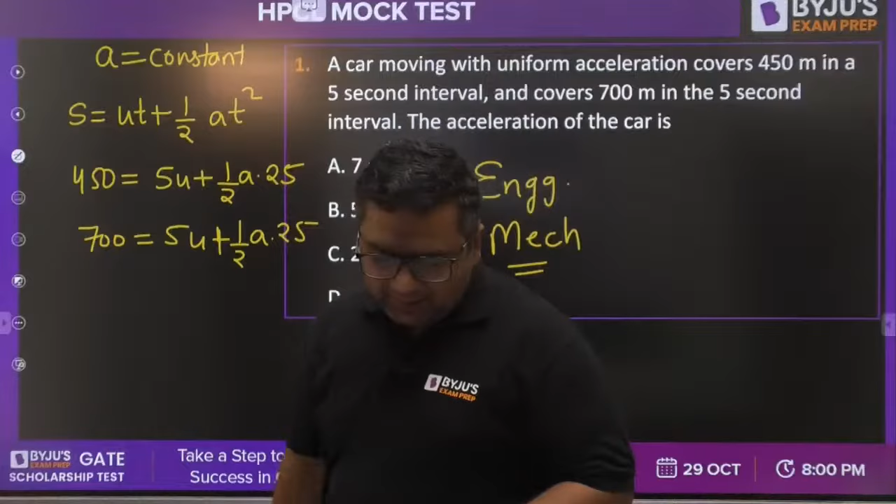Utkarsh is also saying D. Kiran Kumar is also saying D. And guys, the answer will be coming out to be A equals 10 meters per second square. So yes, D is the right answer. D is the correct answer. So this type of question will be there in HPCL for sure. Anurag, very good dear. Answer will be D for this.

Moving to question number 2 guys. Here option B is this. So he is saying a particle is projected at an angle. This is from projectile, once again engineering mechanics. You can see in the previous year's question also, there were some questions from projectile. So a particle is projected at an angle of theta.

So you can assume that there is a particle which is projected at an angle of theta. Obviously it will be a projectile motion. He is saying that at an angle theta to the horizontal it attains a maximum height of h, and he's asking the time taken by the projectile to reach the highest point of its path.

Sanket is saying the answer to be B. What about others? This time also you will be applying the equation V square minus U square equals 2AS, the equation of motion, because at this instant the velocity in the Y direction is 0, and you are applying this equation in the Y direction. Utkarsh is also saying B.

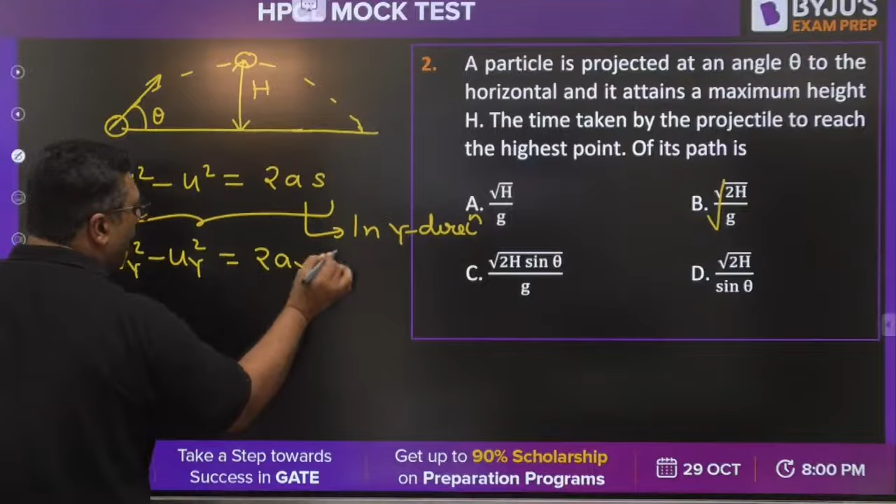What about others? So you need to apply this equation in the Y direction. You will write Vy square minus Uy square equals 2Ay Sy. Vy is 0, Uy is U sine theta, Sy is H as given, and Ay is minus G. These are the things given when you put in the values.

Tomato Singh, Anurag, Mechanical Warrior, Kiran, Vineet, all of you are correct. The answer will be coming out to be B. So B is the right answer. Very good guys, bahut hi badhiya.

So guys, moving to question number 3, I am going to consider around 35 questions out of 85 because I have made more subjects, design plus material science.

Anu Ajay, good morning. Thanks dear. So solve this question now.

The tension in the cable supporting a lift moving upward. So you can see there is a case where there is a lift and mass, and there are two cases. This is also from engineering mechanics. In one case, the lift is moving upward with acceleration A; in the second case, it is moving downward with acceleration A. So you need to use these two cases to tell what is the acceleration of the lift.

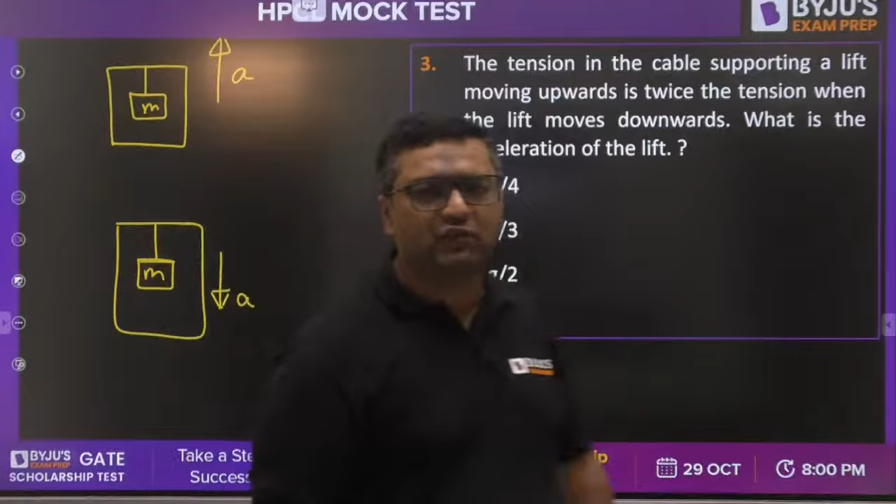Okay, Warrior has given the answer for question 3 as B. What about others? Vineet is also saying B. Very good. Tomato, Anurag, Kiran, Utkarsh - what would be the answer, guys?

Okay, Kiran is saying the answer to be B again. You know that when you apply the free body diagram, this is M, Mg will be acting downward, tension will be acting upward. So here you will write: T minus Mg equals Ma, so T equals Mg plus Ma. Or here you will write Mg minus T equals Ma.

So he is saying that tension is twice for one case, so tension here is Mg minus Ma. Just put this tension as T1 and this as T2. He is saying that the tension in the cable supporting a lift moving upward is twice, so T1 is 2 times T2. When you put this, Mg plus Ma equals 2 times Mg minus Ma, so you get acceleration to be G by 3. B is the correct answer, very good.

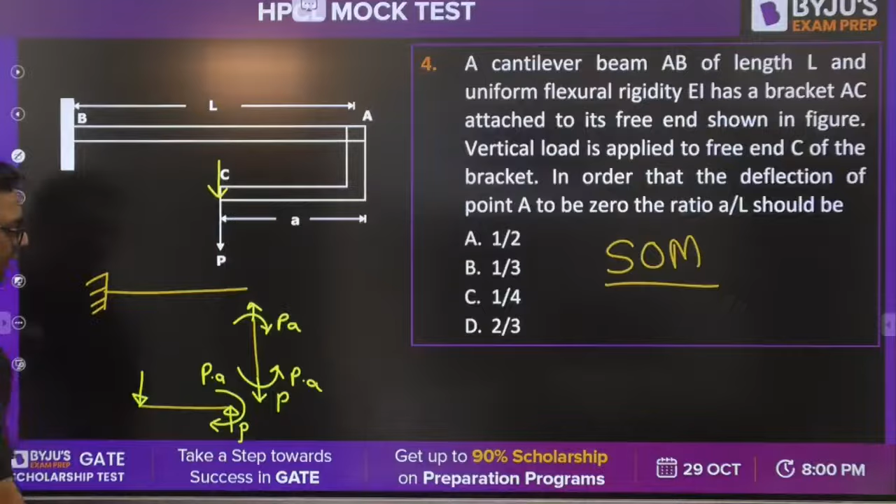As you know, this is A, so this will be creating P force and P into A here. To balance this, this is the force P, and this is P into A couple. Who will be giving this? This member. So when this member applies some force as a reaction, it will give the same here. If P is acting here coming downward and here it is clockwise, it will come anti-clockwise with P into A. Now for balancing this member, there will be a P upward and P into A clockwise. As this is coming because of this member, reaction will come P downward and P into A anti-clockwise.

So you need to see the deflection at point A. Deflection at A will come because of a force and a couple. Deflection at A because of force will be PL cube upon 3EI. Why PL cube? Because length is L for this AB member. Then you write ML square upon 2EI. Bending moment is P into A. Now you put this to be zero. This is downward, this is upward, so minus and plus will come. When you equate, you will get A by L to be 2 by 3.

So I feel D is going to be the right answer, no doubt about that. Very good, guys. Very good, Utkarsh, smarter. D will be the answer.

Moving to the fifth question, once again from strength of material. This is column topic and Rankine theory. As I said, every time I am coming with new questions so that you get something new in every class. That is the benefit of coming live in the classes. What would be the answer for this one? Question number 5th it is. I am still left with 30 more questions and total 85 questions will be solved by the entire team today.

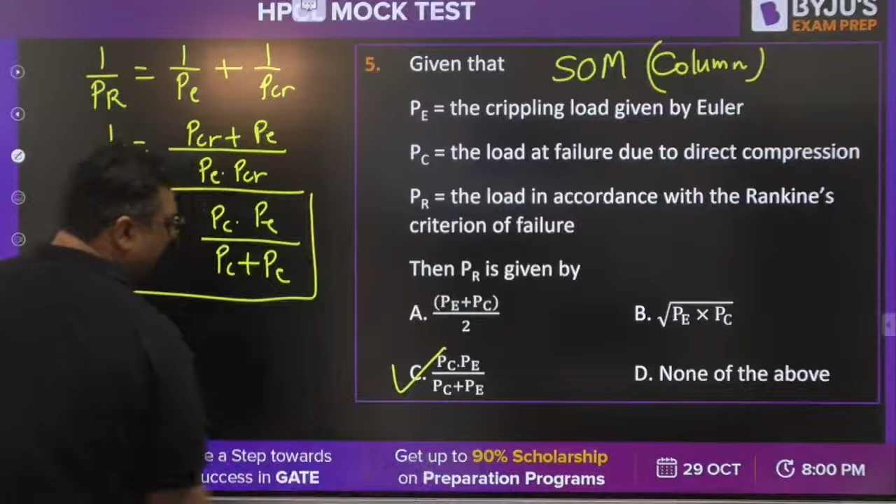Very good. Every one of you have given the right answer. Utkarsh, Vineet, bahut badhiya. Moving to question number 6, guys.

Moving to question number 6. This is from machine design now, design of shaft. Machine design, design of shaft. I am covering all the subjects related to design and plus material science.

Solve this question, guys. Okay, Warrior is saying A for this. Very good. What about others? Vineet, Utkarsh, Sanket, Kiran is also saying A would be the answer. Anurag is also saying A would be the answer. Vineet is also saying A will be the answer. Bahut badhiya. Mani is also saying A will be the answer. Very good, Mani.

So guys, the answer is A for this only. So you know that when we are having a shaft and it is subjected to a bending moment of M, then bending stress induced will be 32M by pi d cube. Similarly, when we will be having a shaft subjected to a twisting moment of T, then shear stress will be coming out to be 16T by pi d cube. They are saying both are equal, then you will be equating sigma B equals to tau S. This is 32M by pi d cube and this equals 16T by pi d cube. So they are asking M equals, M will be coming out to be T by 2, then only it is possible. Okay, so answer 6 is going to be A.

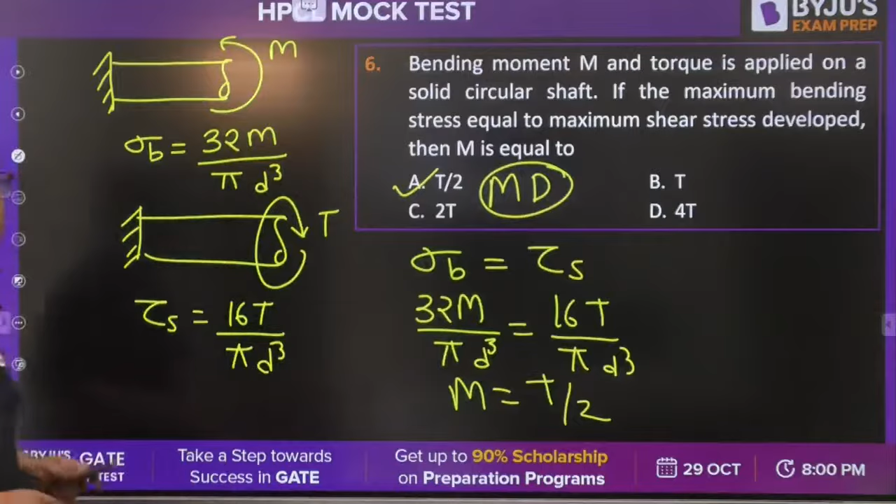Very good, Vineet, Utkarsh, Mani, everyone. Moving to question number 7. This is from strength of material, or you can consider it from machine design also, because here torsion equation will be used and you are going to use the design of shaft again. So from both you can consider, but it is originally from machine design because you are putting strength equals to stress, you are finding the dimension here. So solid shaft subjected to a torque is given to you, permissible stress is given to you, diameter you need to find out.

Yes, Kiran is saying A will be the answer. This is going to be the level of HPCL, guys, not more than that. Vineet is also saying A.

Yes, Mani, Anurag, Utkarsh, Kiran, Warrior, God of Thermodynamics, Tamatar Singh.

What would be the answer? Very good, Anurag, A. What about others? Mechanical Warrior is also saying A. Very good, guys. So the answer for this question is A.

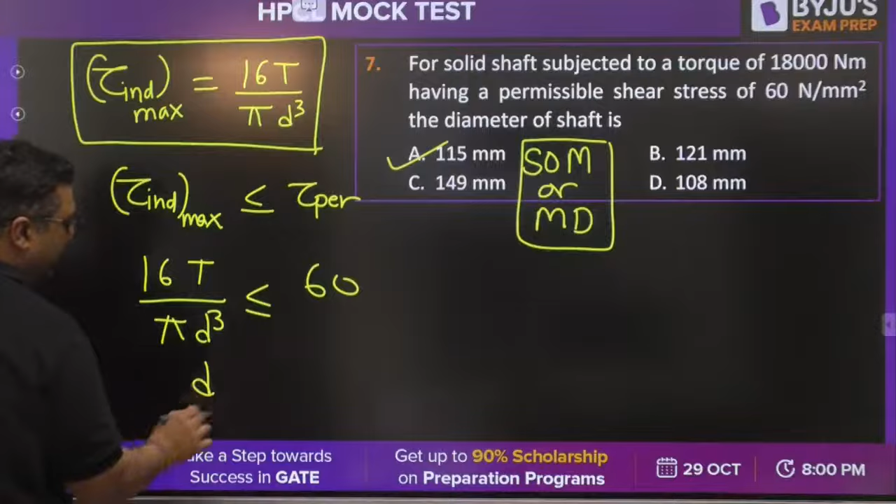You know that tau induced maximum is given as 16T by pi d cube. If you use this much, this is SOM, but when you write tau induced maximum should be less than equals to tau permissible, this becomes machine design. So 16T by pi d cube less than equals to tau permissible is 60. You will get dia to be more than equals to 115 mm. A would be the right answer.

Question number 8, it is very easy, but this type of question is there in HPCL. That's why I am keeping the similar question, because exam pattern is going to remain same. No Utkarsh, but 3-4 questions they have given last year also, which you would have difficulty solving without calculator, so I have maintained that as well. Because 3-4 questions will be coming like that, so for that you must be prepared. Solve them in the last, where you find a lot of calculation.

Achint is saying C, Anurag is saying C, Sanket is saying C. Anurag, Vineet, Achint, Sanket, Warrior, Kiran. Very good. So the answer for this is C, because we know that dm by dx is equals to shear force and dv by dx is equals to load intensity. So C is the right answer.

Moving to 9th question, this is once again from the 7 to 8 cases of deflection which you need to remember. Let us see how many of you give the right answer for this.

Very good, Mani. Question number 9, what would the answer be? Warrior is saying A, Kiran is saying A. Very good. If you remember that table of 7 to 8 cases, you can answer it very easily. Anurag is also saying A. Very good. Yes, Sanket, Achint. Sanket is saying A. Very good. Achint, Vineet. Very good, Mani. Answer is A. Shubham Shekhar. Very good. Answer is A.

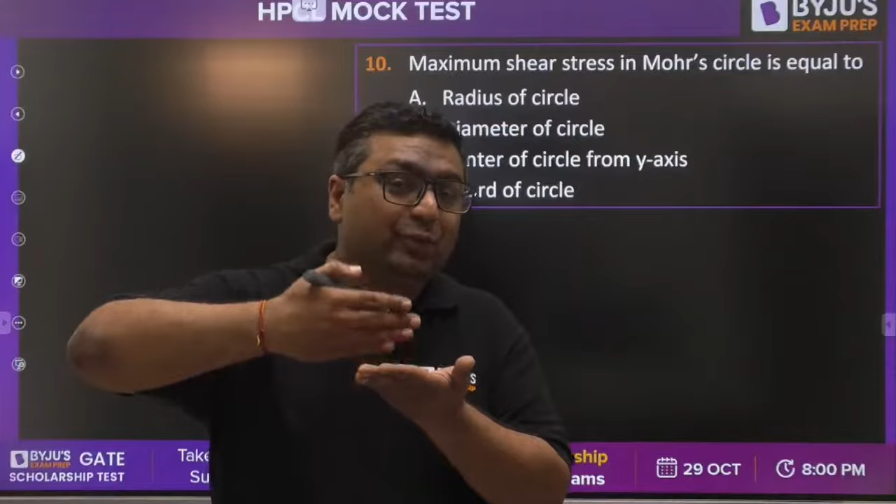Sanket, very good. Dear, actually, this is the philosophy. Like if we are studying, when we are away from the exam, we try to keep the level of questions a little bit harder so that you prepare for something better. But when the exam is near, your motivation is also required. So when exam is near, at that time you need to solve questions just like the exam is asking, because if I keep very hard questions, you will be unable to solve them and get demotivated, and the level of exam is not going to be that much. So that is the philosophy. Whenever you prepare, even for test series, even for GATE, this will be followed by all the test series. So tests which are near, like CBT near to GATE, they will be of GATE level only. Before that, whatever you give will be of harder level a little bit. So this is the philosophy, actually.

So guys, when we are talking about Mohr circle, whenever Mohr circle is plotted, one end gives you sigma 1, other end gives you sigma 2. And if that is the case, diameter of circle is given as sigma 1 minus sigma 2. So radius is given as sigma 1 minus sigma 2 by 2, which is nothing but tau maximum. So radius will be the right answer.

So next question is from spring, once again a machine design question, design of spring. Here they are asking about the series parallel connection. Let us see how many of you give the right answer.

Warrior is saying B for that. Very good. Kiran B, Vineet B, Sanket B, Achint B, Anurag B, Utkarsh B, बहुत बढ़िया. God of Thermodynamics B. And guys, yes, the answer is going to be B.

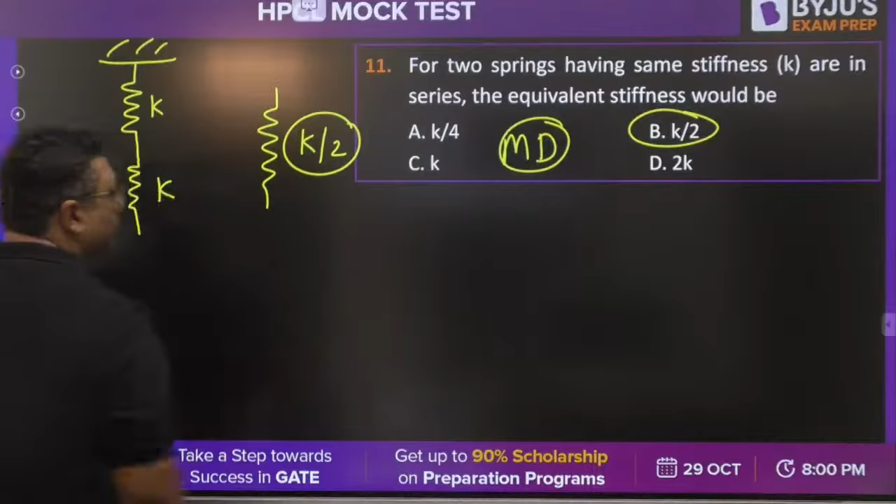They are saying two springs having same stiffness are in series. There is one spring stiffness K, there is another spring stiffness K. So my dear, if that is the case, the equivalent spring will be having a stiffness of K by 2. So B is going to be the right answer here.

हाँ, कटिंग में 2K आएगा when you are going to cut a spring into two parts, then stiffness becomes double. Why does it happen? Because stiffness is inversely proportional to length. So when length reduces, stiffness increases.

A material is classified as brittle - this is from testing of properties. If you go as per GATE syllabus, it is the part of SOM. In HPCL syllabus, this is the part of material science. So this is the definition of ductility.

Very good. हाँ, parallel में add होगा पीयूष, बिल्कुल सही. So guys, just like and share the session. Warrior is saying D, Kiran is saying D, Anurag is saying D, Vineet is saying D. Utkarsh is skipping this. सोम नहीं attend किया उत्कर्ष।

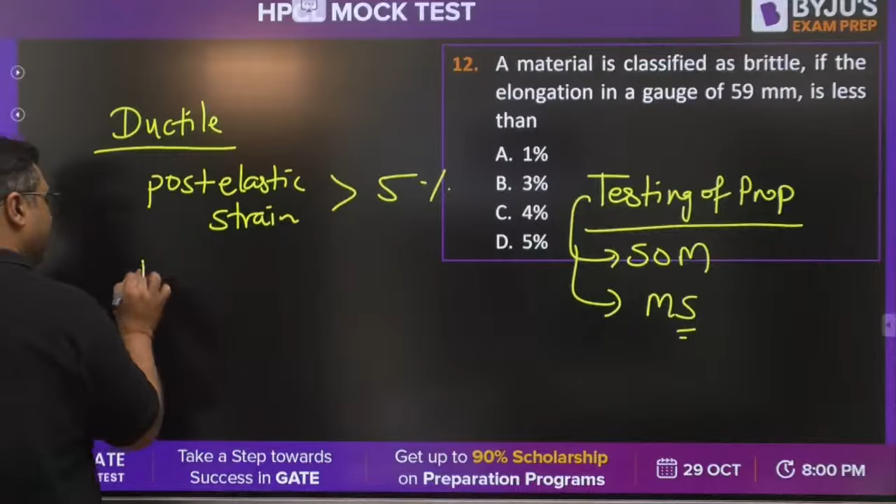If you remember, I told you a material is said to be ductile if post-elastic strain is more than 5%, then it is said to be ductile. And if post-elastic strain is less than 5%, the material is said to be brittle. So D is going to be the right answer here.

Question number 13 from machine design again, fillet weld. Very good, Parv. Very good, Kiran. Wonderful. Fine. So question number 13, in fillet weld, throat is defined as.

In fillet weld, throat is defined as. Fillet weld, if you want to see, my dear, I would like to show you. Like, let us say we have this kind of figure. So even we can show it with the normal case as well, like this. When you are going to join like this, if forces are acting like this, then this type of weld is fillet weld.

Yes, it is a kind of lap joint, you can say. This is parallel fillet. If forces are acting like this, it is transverse fillet. And if you want to see this, we can assume this fillet weld as a triangle like this. So this will be the perpendicular and this is nothing but the minimum thickness. This is going to be the minimum. So this minimum is said to be throat.

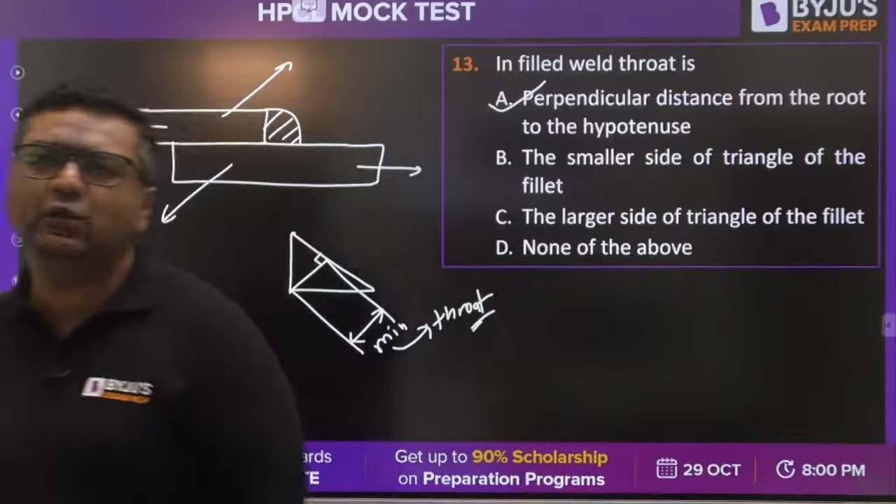Okay, so answer will be A for this. Very good, Utkarsh, Thermodynamics, Anurag, Vineet, Parv, Kiran, Warrior. Very good. Moving to question number 14.

Now the question is from Theory of Machines, Governor topic. So I have covered all the things, guys. This is from Governor - Sensitivity of Governor. The ratio of difference between maximum and minimum speed to the mean speed. The ratio of maximum to minimum speed. Range of variation in engine speed.

Very good. So guys, you know that sensitivity is defined as delta n upon n mean. This is the definition of sensitivity of governor. So for that, the answer is going to be A for sure. No doubt about that. Moving to question number 15.

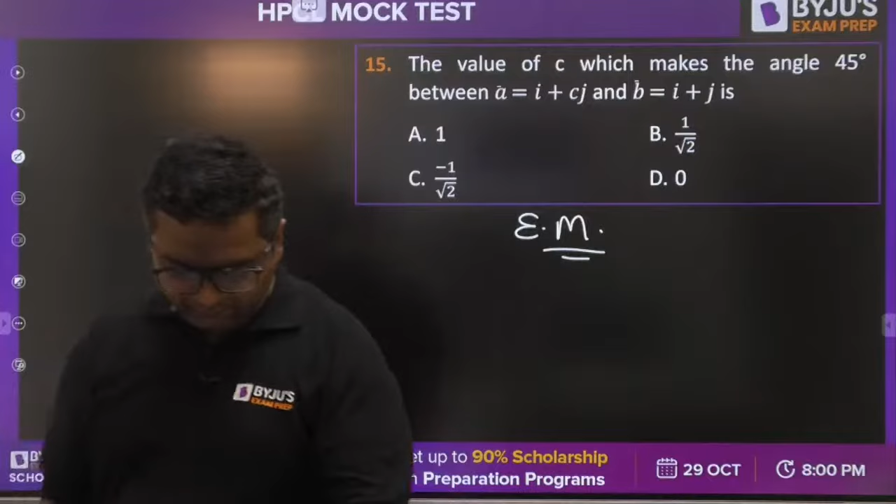Once again from engineering mechanics. This is from engineering mechanics. The value of C which makes the angle 45 degree between vector A and vector B. Yes. So you can see vector A is I plus Cj. Then vector B is I plus J. So you know it is mentioned that angle is 45.

Cos theta can be written as A vector. Okay, one second. Do you know the dot product? If I write dot product, it can be written as AB cos theta. So the same I will write here, A vector into B vector divided by A vector ka magnitude, B vector ka magnitude. This is what you need to do. Put theta as 45 degree, you will get your answer using the dot product. Wonderful, wonderful, wonderful.

Very good, Utkarsh. Vineet is saying B, Anurag is saying B, Kiran is saying B, Warrior is saying B. Yes, what about others? What about others?

You know that this is AB cos theta, using cos 45 which is 1 by root 2. Do you know how the dot products are calculated? 1 into 1 plus C into 1, it will be 1 plus C, divided by A ka magnitude, B ka magnitude. A ka magnitude is root of 1 plus C square, and B ka magnitude is root of 1 square plus 1 square. So solving this, you will get the value of C. So 1 by root 2 equals 1 plus C by root of 1 plus C square into root 2. Root 2 will be cancelled out, so 1 plus C equals root of 1 plus C square.

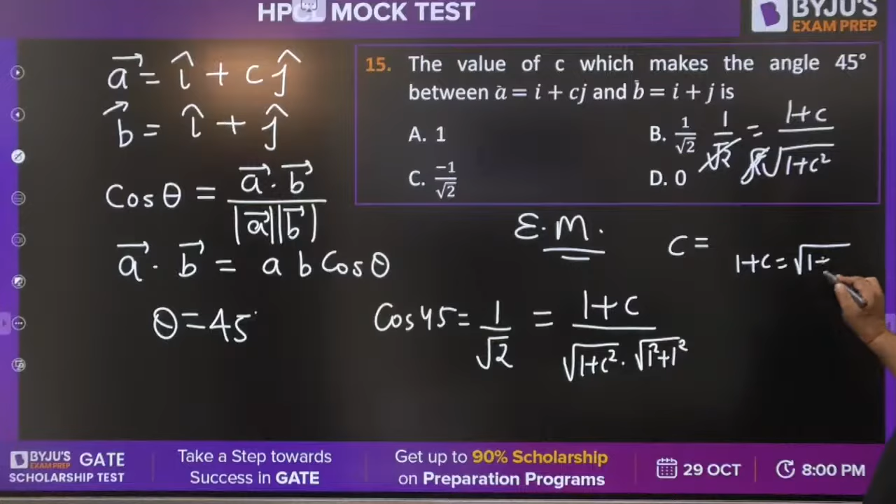Square both sides. 1 plus C whole square is 1 plus C square. 1 plus C square plus 2C equals 1 plus C square. C will be coming out to be 0.

The answer for this question is D. I feel none of you have given the right answer. Am I correct? Yes, D is the right answer. Scorpion, Utkarsh, Warrior, Kiran, Anurag, Vineet, this time all of you are wrong. Yes, you can use that geometry approach.

Very good, so moving to question number 16. This is from vibrations now, because we study SHM in vibrations only, so this is from vibrations.

Very easy question guys. Sir, when is the mock test for electrical? Sanjana, actually mock tests are planned for all the branches. Today we are having for mechanical. I feel tomorrow or day after tomorrow you will be having for electrical. So you will get an update for that, don't worry.

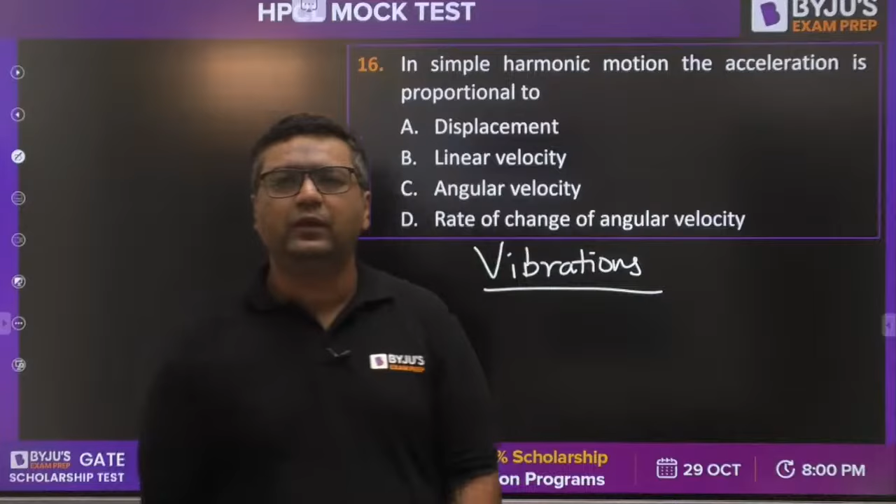Warrior is saying A, Kiran is saying A, Anurag is saying A, Vineet is saying A, Naveen is saying A. Very good guys. So you know that whenever we write the equation, it comes out to be mx double dot is minus sx. So you can say this is acceleration, this is displacement. So acceleration and displacement are directly proportional. A is the correct one.

Moving to question number 17, once again from vibrations. As I said, I have covered all the subjects, whatever related to design plus material science. Material science questions will be coming now.

Very good, Ramesh Mon. Kiran is saying answer to be D. Very nice. Sir, actually EM is remaining, so can't able to. No issue, no problem, we have time for that. Anurag is saying D, Warrior is saying A, Ramesh Mon is saying D. What about others?

Very good, Warrior is saying D. Very nice. So guys, the answer for this is D, because you know at node we have zero deflection, zero deformation, zero angle of twist. So that is why their vibration is also zero. Okay, so the answer is correct.

Once again we are moving now to strength of material, because there are properties: malleability, hardness, resilience, and isotropy. Let us see how many of you give the right answer for question number 18.

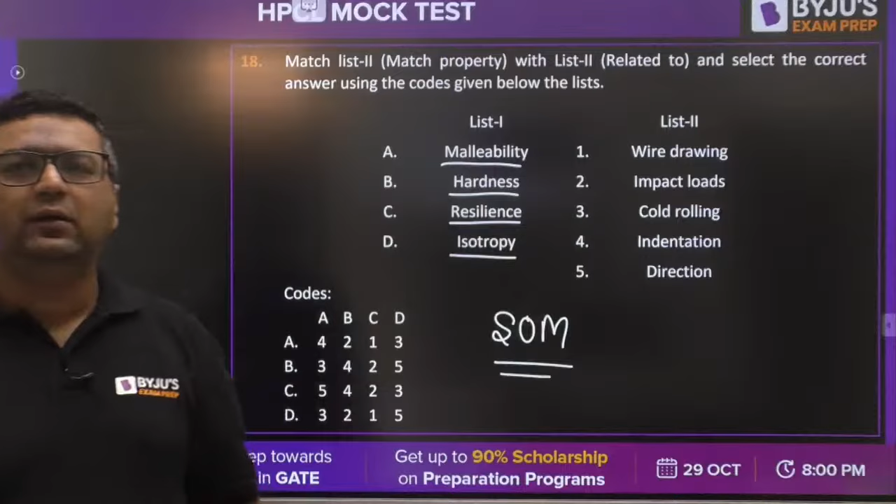Achint is saying B, Kiran B, Ranjit B, Mechanical Warrior B, Vineet is saying B, Anurag is saying B. Wonderful guys, the answer is yes, B.

Because you know that hardness is related to indentation; resilience, isotropy, malleability differ. Malleability is related to rolling, and resilience is related to impact load. Actually, toughness and resilience are related to that. And isotropy is related to direction, because when elastic properties are same in all directions, it is said to be isotropic. Moving to question number 19.

This is from Theory of Machines, gears topic.

Pitch diameter is equals to the product of circular pitch into number of teeth. Very good, so Kiran is saying the answer to question 19 is A, Anurag is saying A, Naveen is saying A. Very nice. You know that circular pitch is given as pi d by t. So if circular pitch equals pi d by t, where d by t is module, then it is pi into module. So in that way you can define the pitch circle diameter. Diameter is from the module, you can write it as module times t.

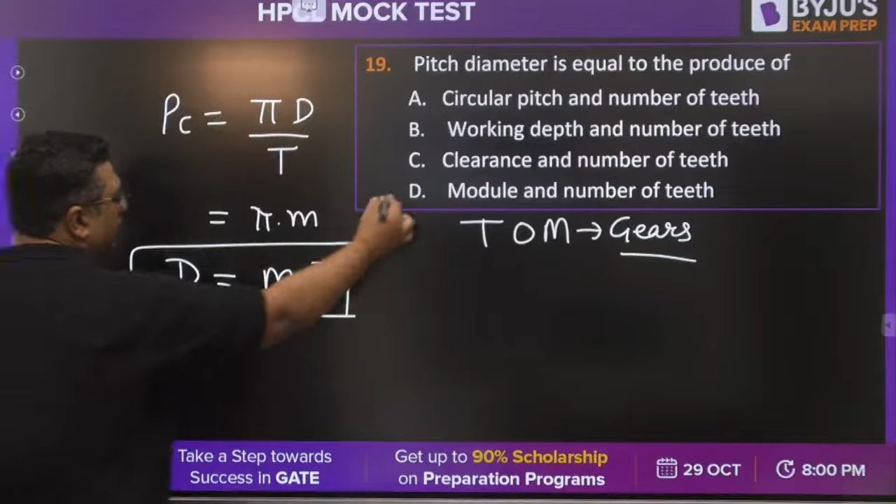Answer will be D. Moving to question number 20 guys, once again from vibrations: critical speed of shaft.

Critical speed of shaft. Very good.

Answer will be D for the 19th question. Warrior is saying A. If you remember whirling of shaft, critical speed of shaft, their vibrations are transverse, longitudinal, torsional. Anurag, Kiran, Vineet, Utkarsh are all saying A. The answer is A, because you were having a shaft on which we were having the rotor like this, so the rotor's weight was shifting the shaft like this. This will create vibration in this direction, which is perpendicular to the longitudinal. Perpendicular to the longitudinal is transverse. So answer is A. Moving to question number 21.

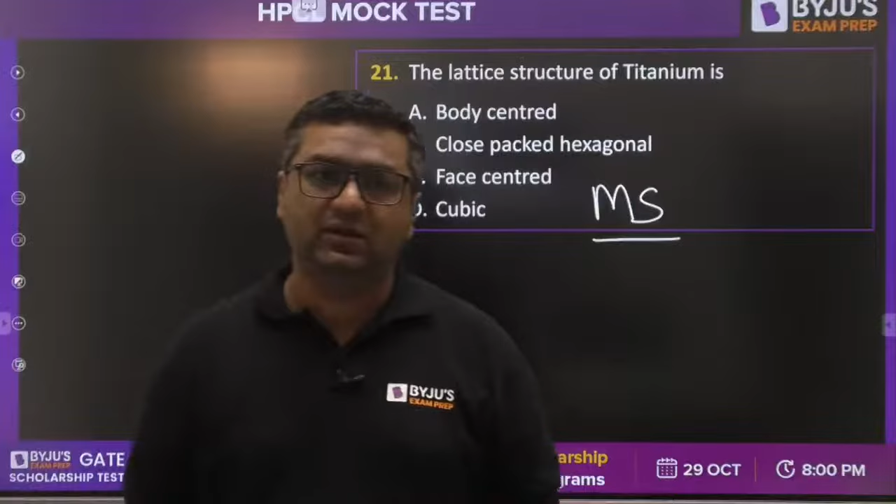This is from core material science. This type of question has been seen in HPCL examination. Even 3 questions were there on the crystal structures. Achint, Kiran, Warrior, Anurag, Vineet are all saying B. When we are talking about titanium, titanium is showing hexagonal close pack structure with C equals to 1.57 times of A. So the answer is B for that. Very good Utkarsh, Piyush, Ranjit. Answer is going to be B.

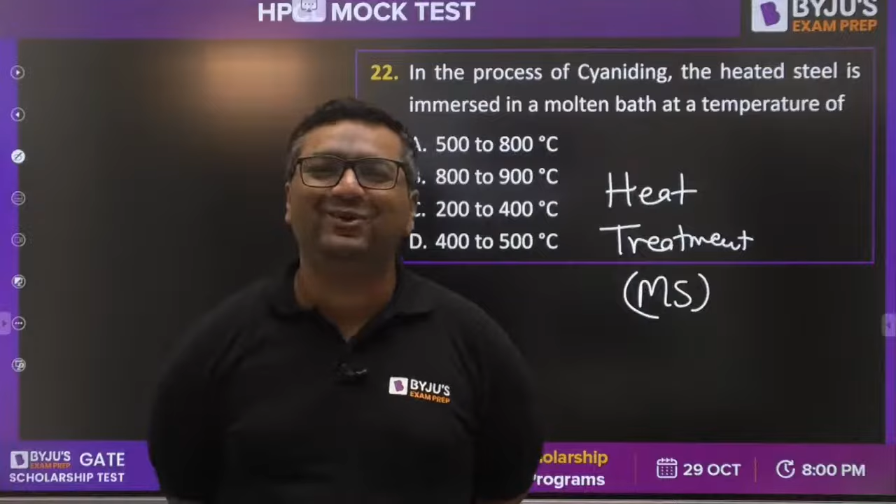Moving to the 22nd question, once again from heat treatment material science. They are asking about the temperature which we are using in cyaniding. Let us see how many of you give the right answer. Warrior is saying B, Achint is saying B. Utkarsh not sure, Anurag, Piyush, Shivendra Pratap. Very good Shivendra, so answer is going to be B. Actually, 850 degrees Celsius is the temperature near to this range only. So answer is B. Scorpion B, Vineet B. Moving to question number 23.

Here they are talking about the coarse grain or fine grain structure, once again from material science heat treatment. I have taken the questions from all the parts. Material science was a favorite of HPCL. If you see last year, many questions were there.

Warrior is saying C, very good. Piyush C, Malapati Vinod C, very good. Achint C, Kiran C, Utkarsh C.

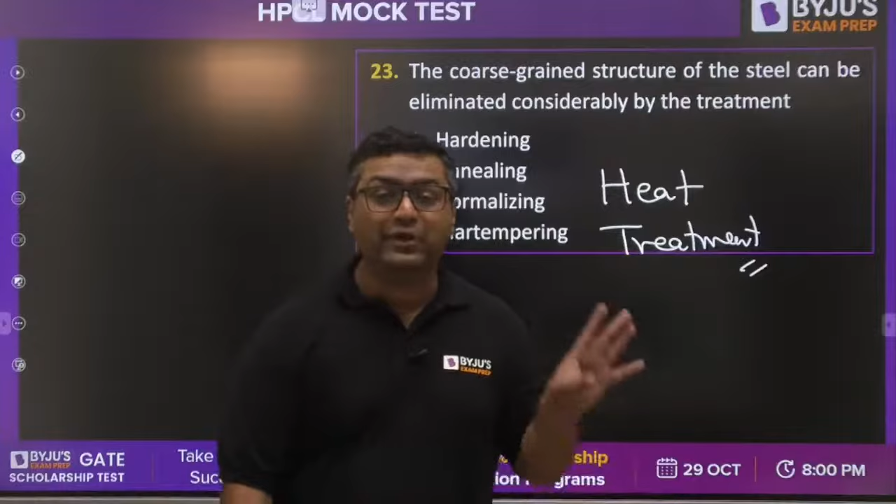Naveen, Ramishmon, Ranjit, Anurag, Vineet are all saying C. Very good, all of you are saying C because normalizing will give you fine grain structure. Moving to question number 24, this is from flywheel theory of machines. This type of 3 questions were there in HPCL last year's examination.

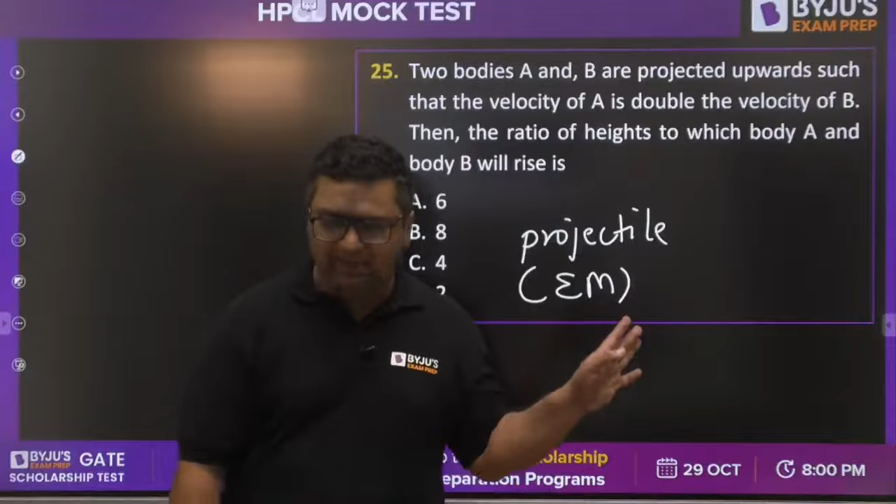Vinod C, Naveen C, Kiran C, Ranjit C, Anurag C, Achint C, Ramesh Mon C, Warrior C. So guys, answer is correct. I would like to tell you, when we are going to write down the expression for maximum height, it is coming out to be U square upon 2G. So you can see H is directly proportional to U square. So when you will write HA by HB, it will come out to be UA square upon UB square.

Kuldeep, Vinod, CB, Kiran is saying A, Vinod A, Anurag A, Warrior A, Kuldeep.

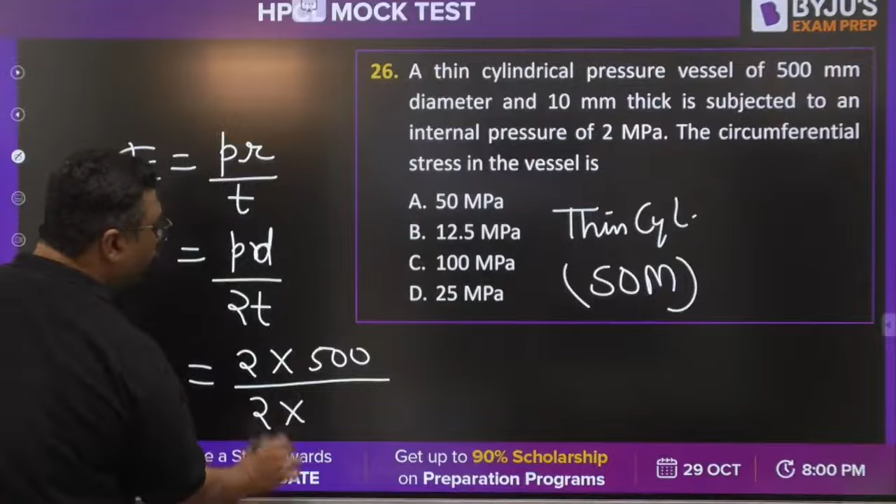Vineet is saying A, Naveen is saying D, Achint is saying A. So guys, pressure is given as 2, diameter is given as 500 divided by 2 into thickness given as 10. The answer will be 50 MPa. A will be the right answer.

Very good, Ramesh Mon. Okay Naveen, I don't know why you made that mistake. Once again, this is coming from vibrations, damped vibrations.

Vibration, material science - a lot of questions have been asked by HPCL.

So from my part, we reached question 27. Actually I am having 40 questions. As per, if total 85 you will go, I need to cover 35. I have 5 extra questions for you. If you want, I will do those also. So they are bonus ones.

Home Sweet is saying C, Warrior C, Vinod C, Utkarsh C, Anurag C, Ranjit C, Ramesh Mon C, Kuldeep C. Very good, and guys, the answer is C.

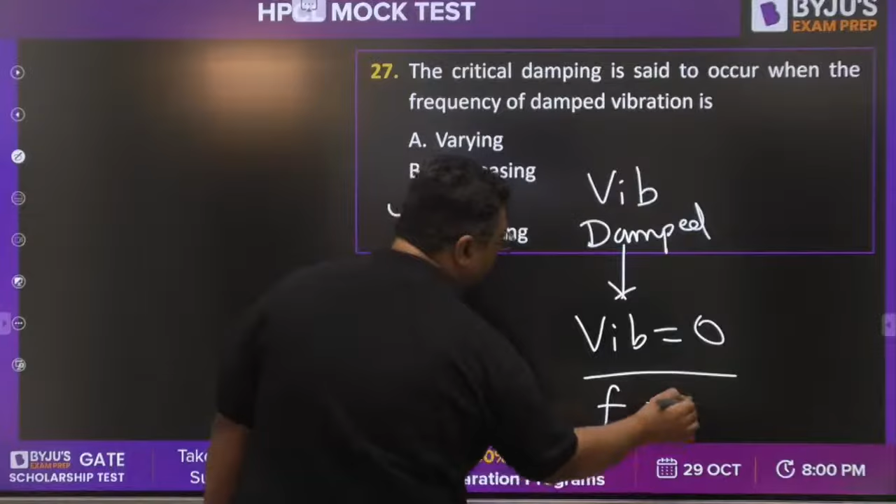Why? Because in damped vibration, vibrations are 0. When vibrations are 0, frequency will also be 0. So in overdamped and critical damped, vibrations are not there.

Fine, fine, fine. So guys, once again from vibrations, this time they are asking about forced damped vibration transmissibility ratio. Transmissibility ratio. Yes. What would be the answer?

Very good, Kuldeep, Anurag, Ramesh Mon, Home Sweet. Moving to question number 29, from machine design, fatigue loading topic, Soderberg equation.

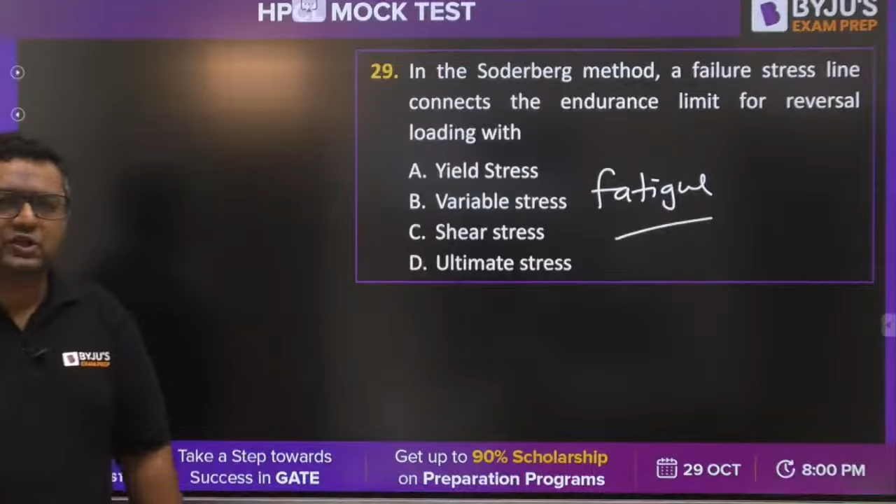Soderberg equation - so you can see how beautifully all the topics are covered. This is from fatigue loading. Kiran is saying A, Warrior A. This is going to be the level of HPCL. Only then will you be able to solve 170 questions in 150 minutes. So they cannot ask you that difficult a question there. Very good.

So guys, whenever we make the fatigue diagram, it is between amplitude stress and mean stress. When you plot the Soderberg equation, it will be Se, it will be Syt. For Goodman equation, it is going to be SUT. And Gerber parabola will be this. So the answer is A.

Okay, so this is question number 30. This time from strength of material, a very basic question.

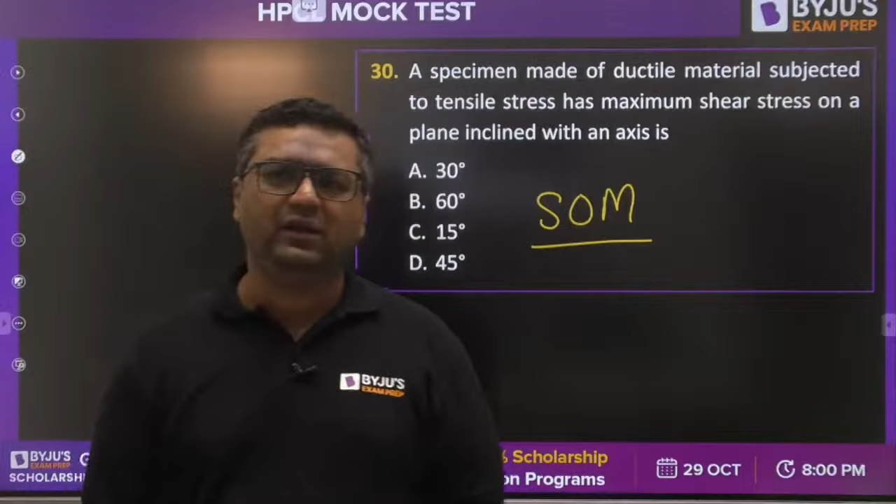Okay, so Kiran is saying D, Kuldeep D, Naveen D, Anurag D, Mani D, Home Sweet D.

Oh, 149. Achint Saxena, it was 149. I was remembering around 141, so I need to check in that case. But yes, it was high, that I remember. So if you are getting more than 140 marks in the test, it is good, but slightly more increase is required.

Yes, very good. So a specimen made of ductile material subjected to tensile stress has maximum shear stress on a plane inclined with the axis at 45 degrees, because whenever we have the principal plane, the plane of maximum shear makes 45 degrees with the principal plane, and the loading is tensile uniaxial. So in uniaxial loading, you know this X face and Y face are principal planes. So if they are principal planes, it will make 45 degrees for maximum shear. That is why the angle is 45. The answer will be D.

Moving to question 31. This is from balancing, my dear. Okay, I feel Ravindra sir has given the answer.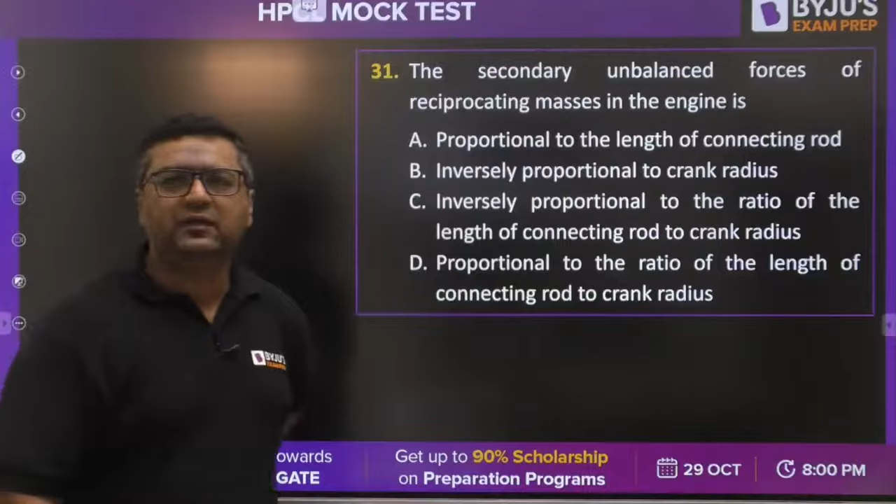146 was the cutoff for the general category. Thanks, Ravindra. So this is from balancing, guys, theory of machines. Solve this question - secondary unbalanced force value.

Warrior is saying C, Home Sweet C, Anurag C, Ranjit C, Kiran C, Vineet C. So the answer for this is going to be C, because primary force is mr omega square cos theta.

Secondary force is mr omega square cos 2 theta by n, where n is L by R. So the answer is C. Moving to question number 32, once again material science, from the iron carbon diagram. Ravi, very good, but for which question are you saying, 31 or 32? Because the answers are different. Warrior C, Home Sweet C, Achint C, Kiran C, Anurag C, Ranjit B, Vineet C.

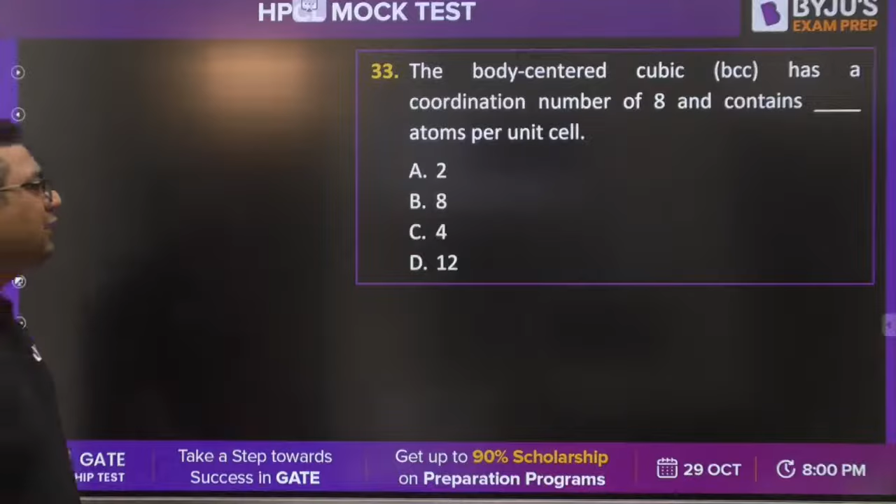Moving to 33, once again from material science, about BCC. Very good, Warrior. Ravi is saying B for this. Vineet is saying A. Warrior A, Kiran A, Achint A, Ranjit A, Home Sweet A, Utkarsh A, Anurag A, Ramesh Mon A, Sanket A.

The answer is A. For BCC, they are not asking coordination number. They said coordination number is 8, and many students after seeing that will just say 8. But they have given coordination number already; they are asking atoms per unit cell. For BCC it is 2, for FCC it is 4, for HCP it is 6, for simple cubic it is 1. The answer is 2 here.

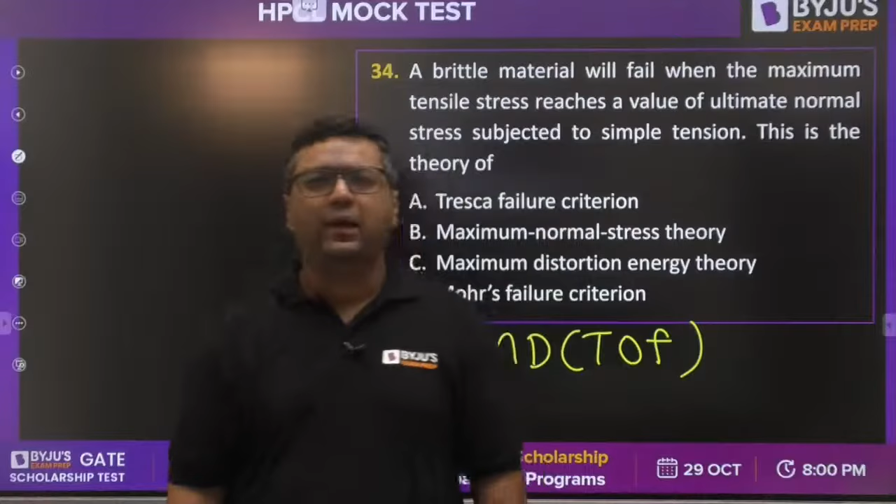Question number 34, yes Dalapati ji, very good. This is once again from machine design, theory of failures. Warrior is saying B, Kiran is saying B, Vineet B, Ranjit B, Home Sweet B, Anurag B, Utkarsh B, Ravi B. Very good, this time Ravi you are correct.

The answer is B, because they are asking which theory of failure takes normal stress as the criteria. It is MPST, maximum principal or maximum normal stress theory. When we talk about shear stresses, Tresca theory takes MSST, which considers shear stress as the criteria. So the answer is MPST.

Once again from strength of material, column topic. From column, last year also 2 to 3 questions were asked. Sir, which theory was useless - maximum principal strain theory or maximum strain energy theory? These are the theories which are not applicable for either ductile or brittle material. Kiran C, Home Sweet C, Ranjit C, Utkarsh C, Achint C.

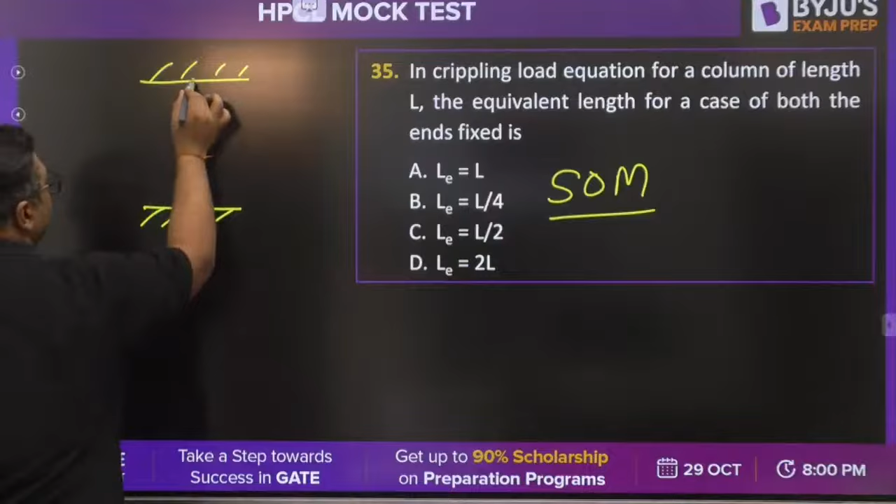Very good. So guys, they are asking for the case when both the ends are fixed. When both ends are fixed, buckling happens like this, so the answer is Le equals L by 2. C is the right answer. Moving to question number 36.

Now these are bonus questions, extra questions, I am taking 3 to 4 more. Then the next faculty will continue. No, Warrior, I haven't forgotten you, you are right.

Yes, this question - okay, Warrior is saying the answer is A. Kiran is saying A, Vineet A, Home Sweet A, Ranjit A, Anurag A. Very good, Achint A, Sanket A.

So guys, if we have one gear whose axis is fixed, and another gear whose axis is not fixed, they are connected with an arm. When this axis or arm moves, this gear will move. This is an epicyclic gear train, where the axis of one gear is moving around the fixed axis. The answer will be A.

Second bonus question is from SOM - pure torsion. This is the case of pure torsion, and he is asking what is the shear stress at the center in pure torsion. Ramesh Mohan, Amit Kumar Negi - what was your question, I didn't see. Mani 0, Achint 0, Ranjit 0, Anurag 0, Vineet D, Ranjit D, Naveen D. Very good, and the answer is D, because the shear stress distribution is given like this.

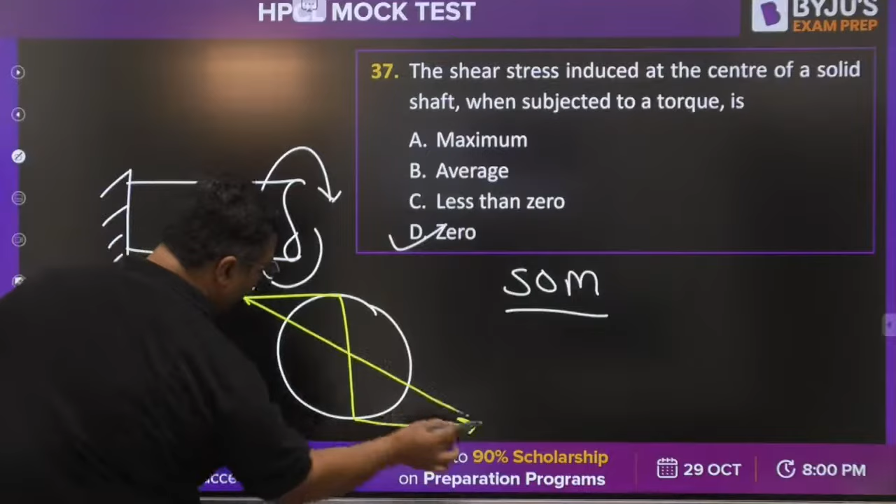Amit, if you have any question, just share with me, I will answer it. At the center, the shear stress is 0, this is the distribution. Okay, very good, Vineet, Piyush. Very good, okay, so this is the last question from my side.

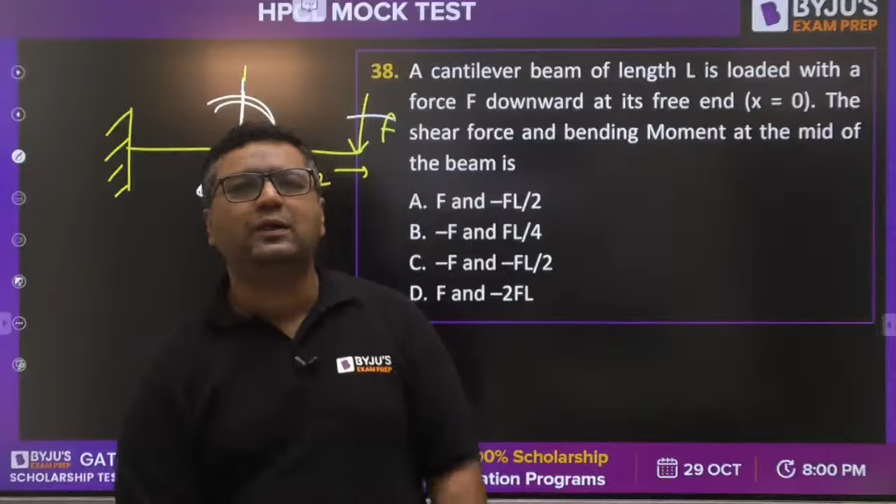If you want the answer for this, you will be using some sign convention. When making the SFD and BMD, what would be the SFD for this? If I take a section here, to the right hand side downward is positive, so shear force will be coming out positive. BMD is going to be like this. You can see BMD is negative, this is positive, so answer will be A. Shear force will be plus F and bending moment will be minus FL by 2.

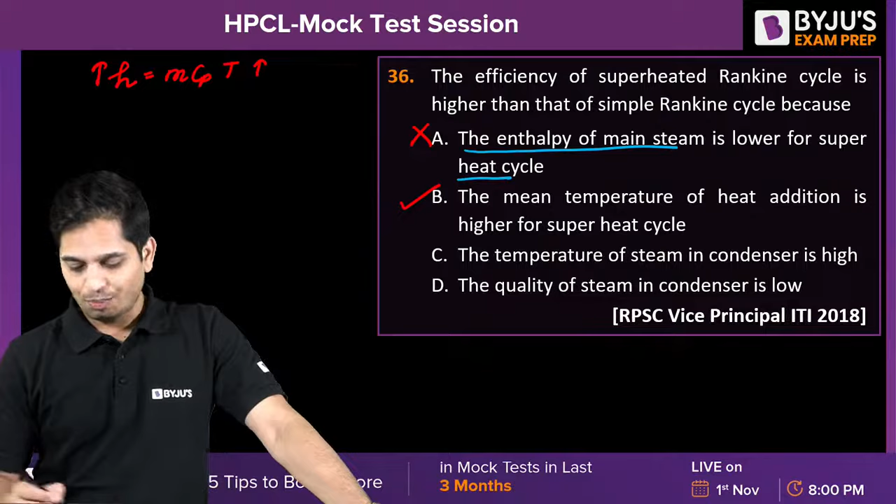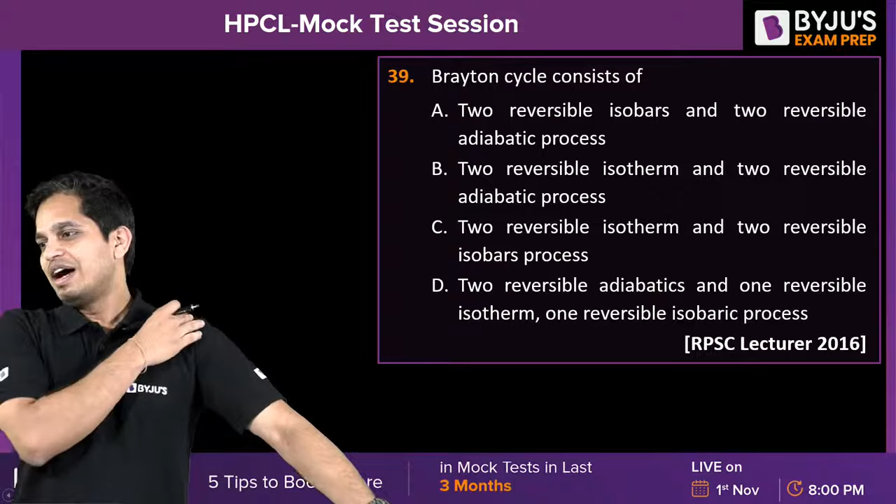Adarsh is saying B, Kiran is saying A, Rameshwan is saying A. So which one is correct? Mani also says A.

So A is absolutely correct. We have 2 constant pressure and 2 isentropic processes. If I draw the TS diagram, then there are 2 isentropic and 2 constant pressure processes: 1, 2, 3, 4.

This is constant pressure, and 1 to 2, this and this, is isentropic.

What are the components? We have a boiler, we have a combustion chamber, a compressor, combustion chamber, turbine, and here you can assume it is a closed cycle, so it is a heat exchanger. This is also a heat exchanger. By using air standard assumptions, it is a combustion chamber. But when we apply air standard assumptions, we assume combustion is happening somewhere else, and we are supplying heat from the combustion chamber in this heat exchanger.

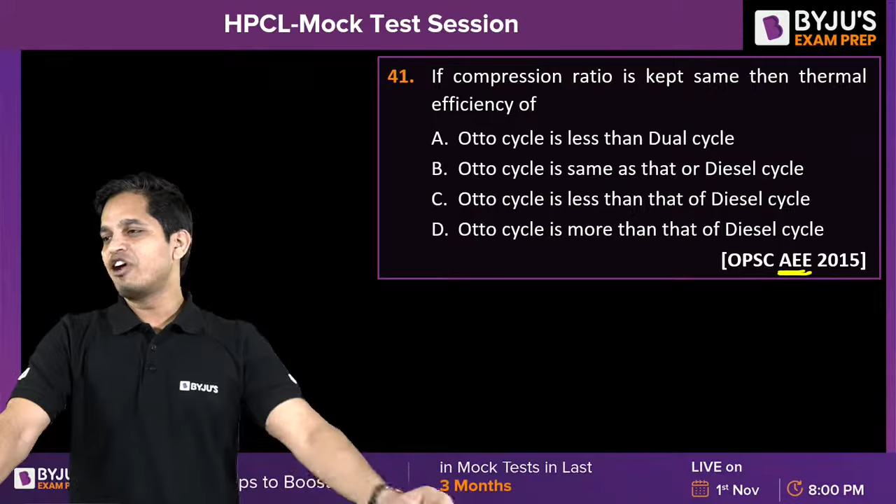Okay, chalo. If the compression ratio is kept the same, then what is the thermal efficiency for question 41? Mechanical warrior says D, Kiran says D. Anyone else? So if same compression ratio...

Yes, D, very nice. So the efficiency of Otto is greater than dual, and then diesel.

And if the maximum temperature Tmax is the same, then what will happen? In the Otto cycle, the limit of the maximum compression ratio is because of detonation, so you cannot go to higher temperatures. Then option A, yes that is true. So it is diesel, dual, Otto. The highest is diesel, then dual, then Otto.

Yes, that is correct. Chalo, so D is the right answer. Next question: compression ratio in an SI engine varies from what?

42A, very nice, yes this is true for SI engine. Can you tell me what it is for CI engine? What is it for CI engine? Yes, 42A is correct, yes, it is around that.

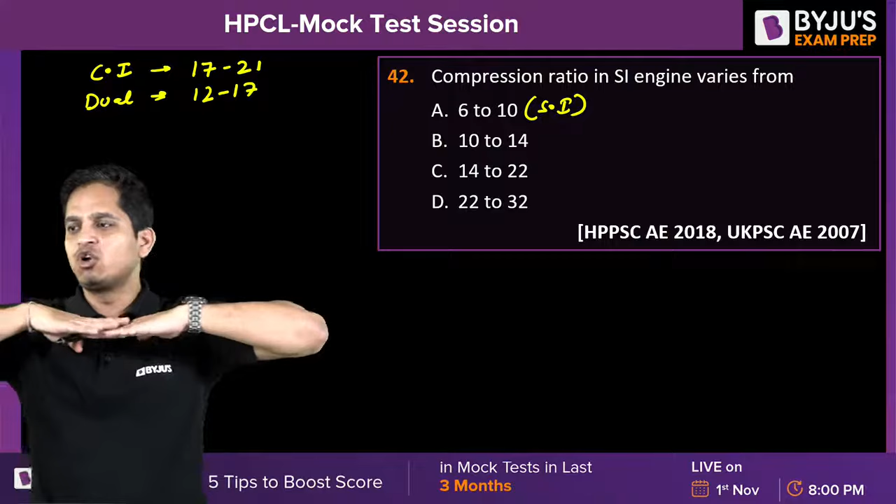Thank you. Compression ratio for CI engine varies from 17 to 21, or 16 to 21, something like this. And for dual, it is around 12 to 17. There is no fixed limit, you can say 12 to 16 or 12 to 17. Okay, chalo, so A is correct.

Next question: in an engine working on the ideal Otto cycle, the temperature at the beginning and end of compression are 300 Kelvin and 600 Kelvin. What will be the air standard efficiency? Very quickly. Efficiency of the Otto cycle is 1 minus 1 upon R to the power gamma minus 1.

One, two, three, four.

Sir, how many questions will you cover? I'll go till 50. After that, Chandrasekhar sir will come and he will take heat and mass transfer and fluid mechanics. And Kiran is very fast and absolutely correct. Yes, that is also correct.

What is R? R is V1 by V2. And it says the temperature at the beginning and at the end of the compression is this. That means T2 by T1 equals V1 by V2 to the power gamma minus 1. So T2 is 600 and this is 300, and that is R to the gamma minus 1. So I can directly put 1 minus 1 upon 2 here, which is 1 minus 0.5. So you get 0.5 as the answer, and 50% is the efficiency.

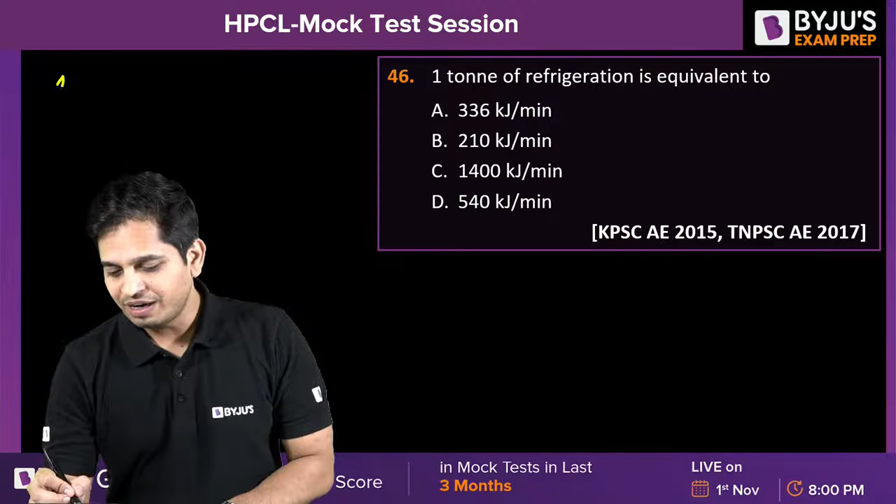1 ton of refrigeration. 1 ton of refrigeration, very quickly. 1 TR of refrigeration.

46. Anyone else? Yes, that is true. 210 kilojoule per minute, and 3.5 kilojoule per second. So if it is in kilowatt, then it is 3.5. You just have to divide it by 60. That's all, nothing else.

So 210 kilojoule per minute is the right answer. That is true. Chalo, let us move on to the next question.

COP of a reversible heat pump is 1.2. And if it is reversed to run as a heat engine, then what is the efficiency? Yes, that is true. So you all know, you should know three relations: efficiency of heat engine equals 1 upon COP of heat pump, and it is also equal to 1 upon COP of refrigerator plus 1. So whenever a question comes, you don't have to think about it, just directly use whatever relation is needed.

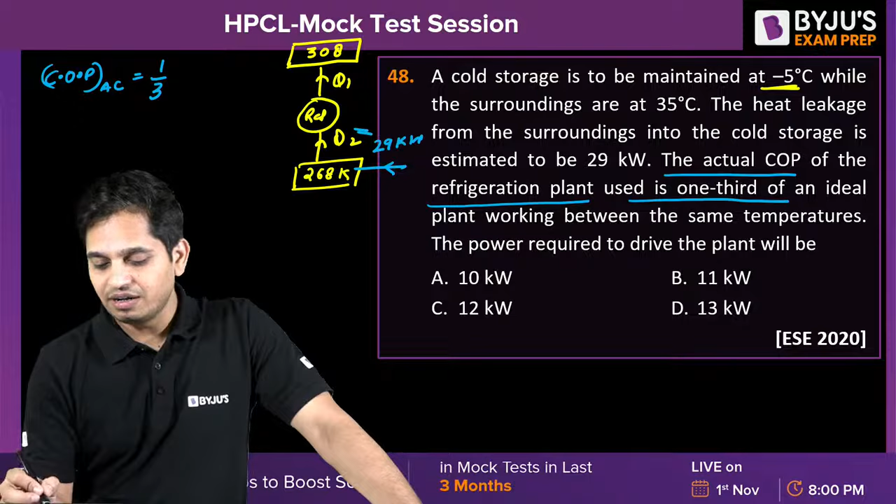Actual COP of the refrigeration plant is 1/3 of the ideal plant working within same temperature limits. So COP actual is equals to 1/3 of COP ideal.

12.985 — Kiran is saying 12.985. So that means the answer is D. That is correct, absolutely correct. Thank you, very nice. Anyone else?

Sir, how to solve lengthy questions? It's a very simple question. It looks lengthy, but it is not lengthy. Solution is not lengthy, okay.

1/3. What is COP ideal? T2 upon T1 minus T2, and it is 1/3. T2 is 268, and this is 308 minus 268. Which is also equal to, whatever you calculate, Q2 upon work input — you have to give work input. So you calculate this, and since you know Q2, you can calculate W in, which will come out to be 12.985 as Kiran has calculated. ठीक है?

चलो, 49, second last question, 49th question, and very easy question I think. If a Carnot cycle has a coefficient of performance 4, the ratio of maximum temperature to the minimum temperature will be. This is an HPPSC AE question, I am not making these questions. If you are thinking these questions are easy, they are PSU questions, public sector unit questions. I am not making them myself to make your life easy.

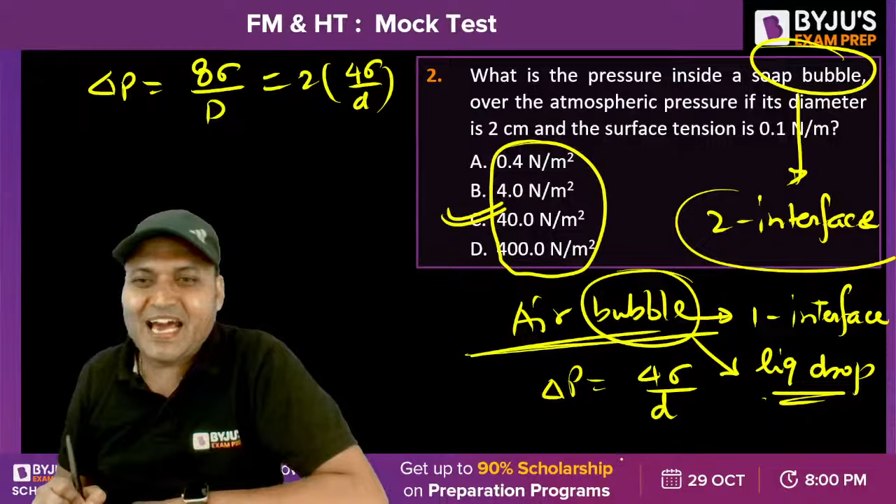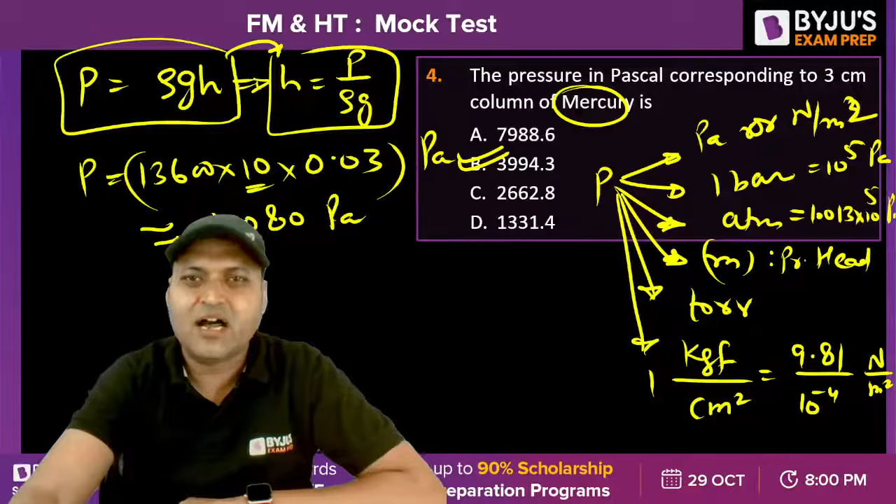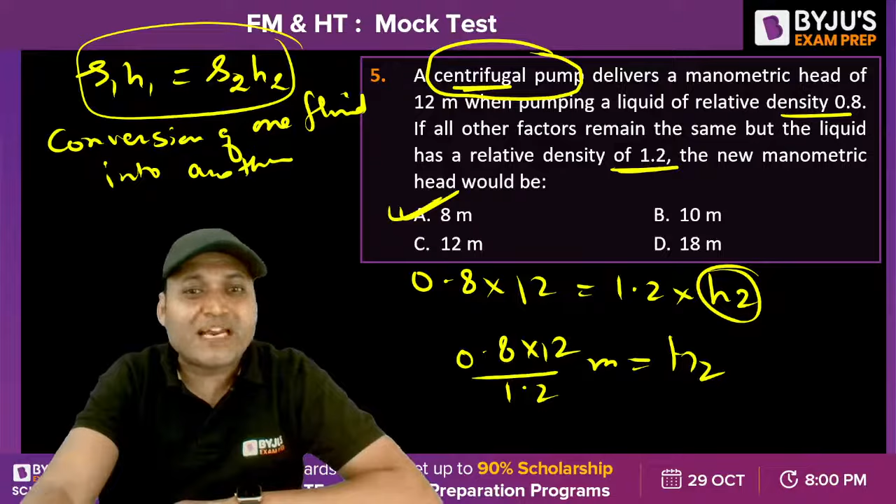Question number 6 - next is question number 6. Everyone, read the question carefully, do not commit silly mistakes in hurry. The speed is always good, but not at the cost of accuracy. Question number 6 on the screen.

An isosceles triangular plate - it is a plane surface shaped as a triangle of base 3 meter and altitude 3 meter. Base is 3 meter, height is 3 meter. It can be considered as a right angle triangle or as a non-right angle triangle - it can be taken as this or this. This is the isosceles right angle triangle, or we can call it as this height is 3 meter.

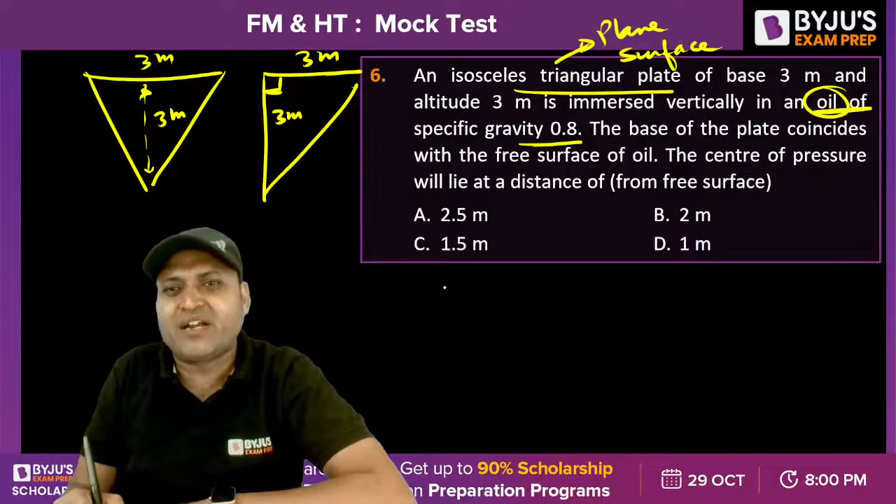It is immersed vertically in an oil - not in water. It is immersed in an oil of specific gravity 0.8. The base of the plate coincides with the free surface of the liquid. The base is coinciding with the free surface of the liquid here - the free surface is here.

Very few students gave the answer for question number 6 - only Kiran had mentioned it. What about others? This is where the free surface is, coinciding with the base. Both diagrams are correct. The center of pressure - people get confused between center of pressure and center of gravity, but they are two different points.

Center of pressure is the point of application of hydrostatic force. Center of gravity is the point of application of gravity force. The center of pressure will lie at a distance - we need to find HCP, the depth of center of pressure where the hydrostatic force is supposed to be acting. This is HCP. Either use the formula - what is the formula for HCP? X bar plus Ig by Ax bar. X bar is the centroid of the plane surface from the free surface, the location of G - that is X bar.

So X bar will be taken as 1/3 H - that is X bar, 1/3 of 3. Ig will be equal to BH cube by 36.

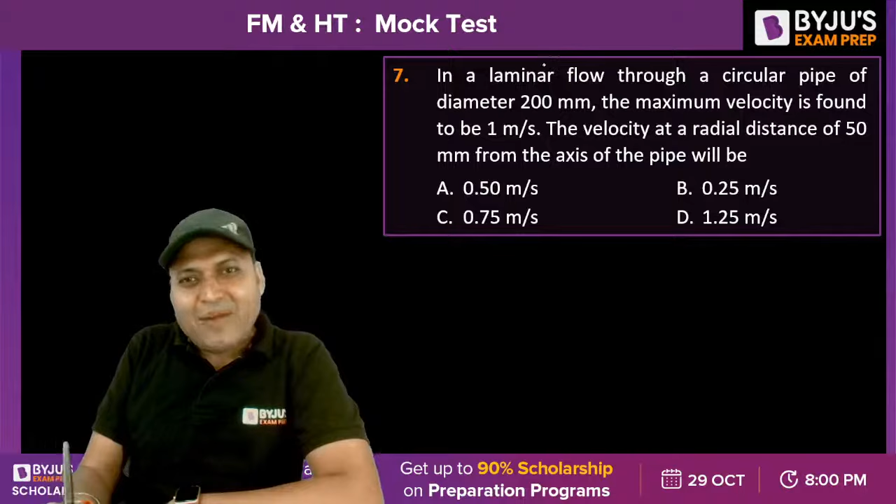Question number 7. Do not commit silly mistakes. In a laminar flow through pipe, when the Reynolds number is less than 2000, isn't it, that makes the internal flow to be laminar.

Through a circular pipe of diameter 200 mm, so what is the radius? Radius is 100 millimeter, do not forget to write the radius as half of diameter. The maximum velocity is the center line velocity, we can call it center line velocity. U maximum is equal to 1 meter per second.

The velocity at a radial distance of 50 mm - we need to find U as a function of R, that is U maximum into 1 minus R square by capital R square. Do you know the formula? For laminar flow, the velocity profile is parabolic. So for R equal to 50 mm, you can find U at R equal to 50 mm, that is U maximum, 1 into 1 minus small r is 50 upon capital R is 100, square. That will give you the answer.

What is the correct answer? Yes, it is not A. It will be 1 minus 1 by 4, that is 3 by 4 meter per second, or 0.75 meter per second. The velocity at a radial location of 50 mm from the axis. The question could have been from the pipe wall instead - do you know if it would have been from the pipe wall?

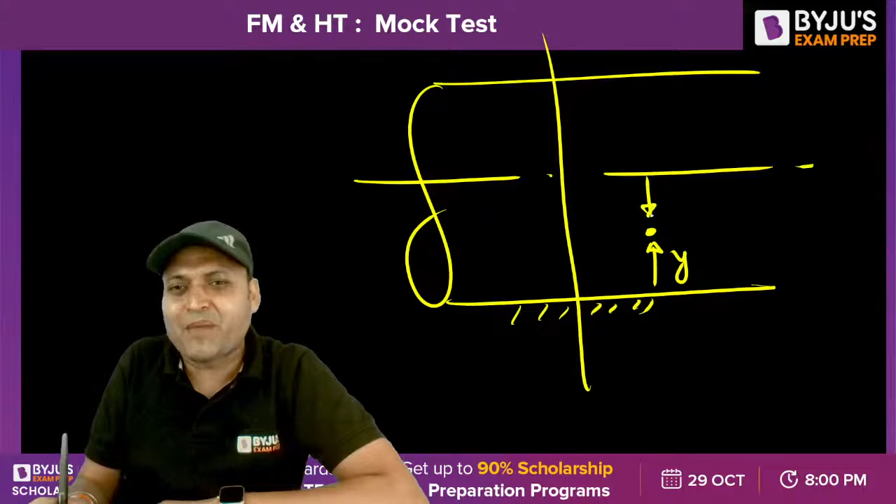This is the pipe, let us say, this is the wall of the pipe. So at any location, this is Y. Y is the radial distance from the wall of the pipe, R is the radial distance from the axis. At the axis, R is equal to 0. Here the velocity is u maximum. The velocity profile will be like this.

So the question could have been at y equal to 20 millimeter - what would have been the value of u? Then you would write r plus y is equal to capital R, so r would be capital R minus y. Capital R is 100 minus 20, so r would be 80 millimeter. You need to calculate r because the expression for u is in terms of r.

I hope this is clear. So if the distance would have been from the wall of the pipe, then you could have calculated the radial distance from the axis. So u is equal to 1 into 1 minus 80 by 100 whole square, that would be at y equal to 20 millimeter.

Next question on the screen. Question number 8. Find the answer to question number 8.

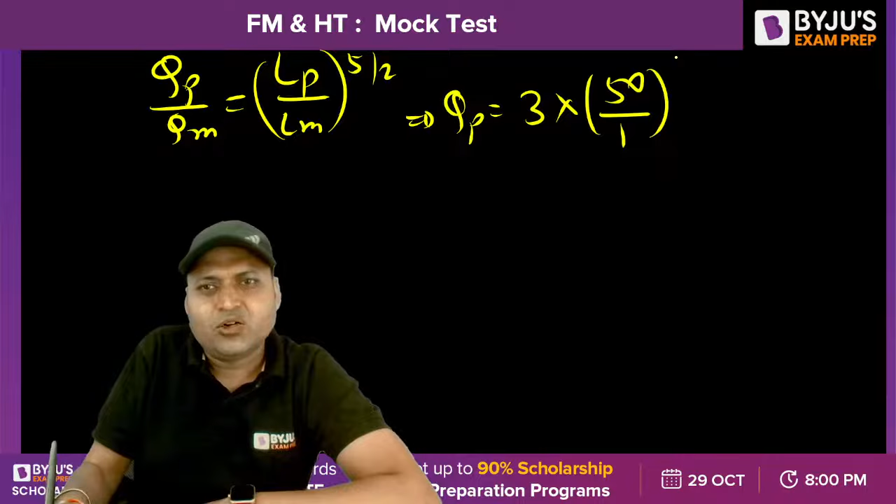So it will be around 3 into 50 square into root 50. Root 50 is around 7, 7 sevens are 49. So it is around 3 into 50 into 50 into 7 meter cube per second. That is QP. I have taken root 50 to be 7 without calculator. So QP, if you calculate, your answer will be around 52500.

Almost 52500. So the nearest option, please find out the nearest option. That is 53,000. Option C is the right answer.

That is how you can solve the question without calculator. Whenever G is there, you can take 10, and under root also you can take the nearest value. So the one which is nearest to your answer will be treated correct.

Question number 9, second last question from fluid mechanics. Everyone quickly solve question number 9. The question is from compound pipe, the pipe is connected in series. When the pipes are connected in series, Q remains constant. Do you know that? When the pipes are connected in parallel, HL remains constant. The losses remain constant for parallel pipes and discharge remains constant for series combination of pipes.

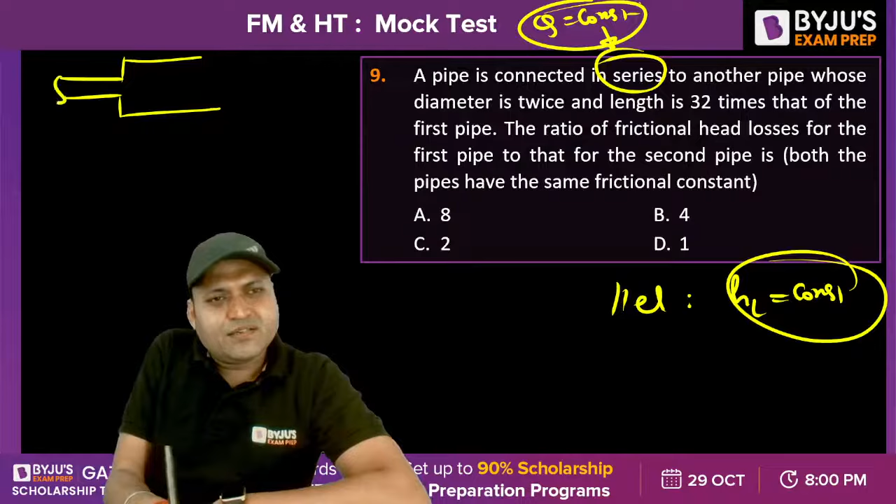Question number 9. Quickly, there are two pipes which are connected in series like this: pipe 1, pipe 2. A pipe is connected in series to another pipe whose diameter is twice, D2 is twice of D1, and length is 32 times, L2 is 32 times of L1. The ratio of frictional head loss for the first pipe to that for the second pipe, HL1 divided by HL2, will be how much? That is the question.

What is the answer for question number 9? So according to Darcy-Weisbach equation, HL is given by FLQ square upon 12.1 D to the power 5, isn't it? The friction factor is same, you can take the constant friction factor. Friction constant is F dash and friction factor is 4 times of friction constant coefficient.

So F is constant, discharge is constant, because the pipes are connected in series. So HL is proportional to L upon D to the power 5. This is the expression. The question is from the relation based.

So if we write HL1 by HL2, then we will write L1 by L2 into D2 by D1 to the power 5. What is L1 by L2? That is 1 by 32. L1 by L2 is 1 by 32 into D2 by D1 is 2 to the power 5, which is 32. That is equal to 1. The ratio is 1. D is the answer.

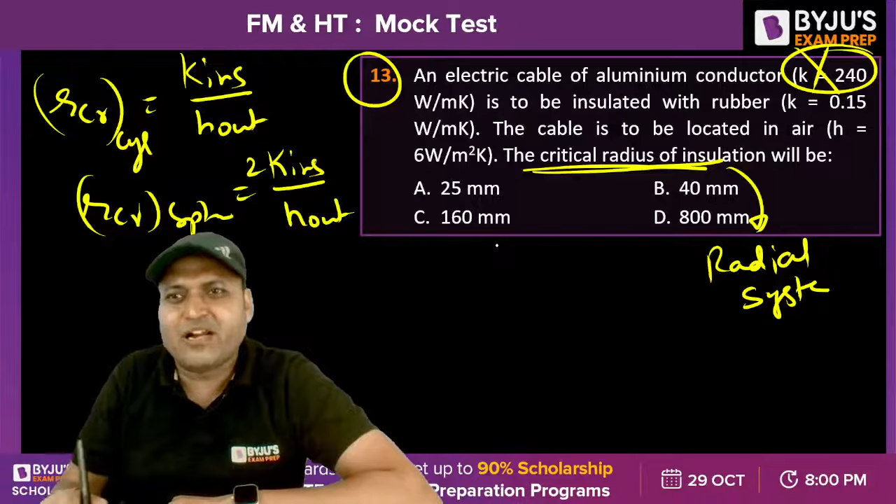So critical radius of insulation for a cylindrical system is K insulation by H outside, and critical radius for sphere is given by 2 into K insulation upon H outside. The thermal conductivity of the aluminum conductor will not be taken into consideration. The conductivity of rubber, the insulating material, will be taken into consideration because it is an electrical cable, meaning a cylinder.

The question is formula based. 0.15 upon the outside air convective heat transfer coefficient is 6 watt per meter square kelvin. You can do the calculation.

Question number 13, the answer will be option A, isn't it? 13A, Kiran, mechanical warrior, Costa, well done, well done. Good, keep it up guys, good going.

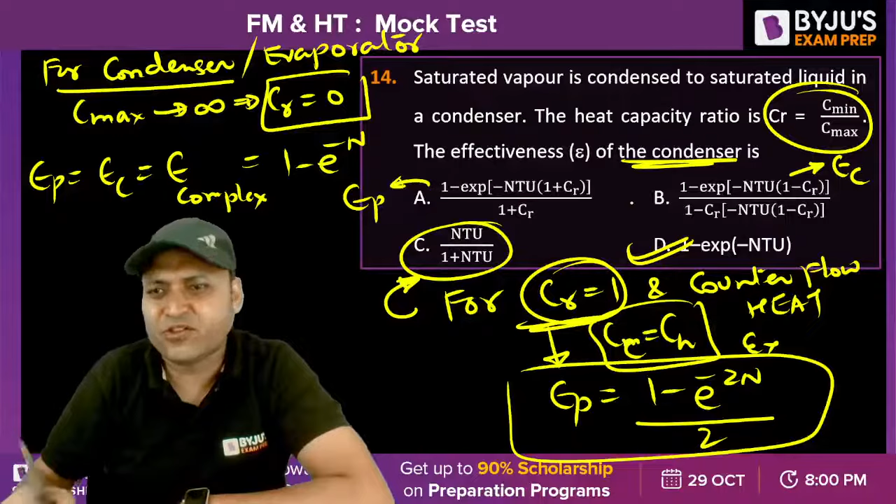1 minus e to the power minus 2n, by 2. For CR is equal to 1, C minimum is equal to C maximum, or CC is equal to CH, when the heat capacity rates are same for hot and cold fluid. So the correct answer for this question is option D.

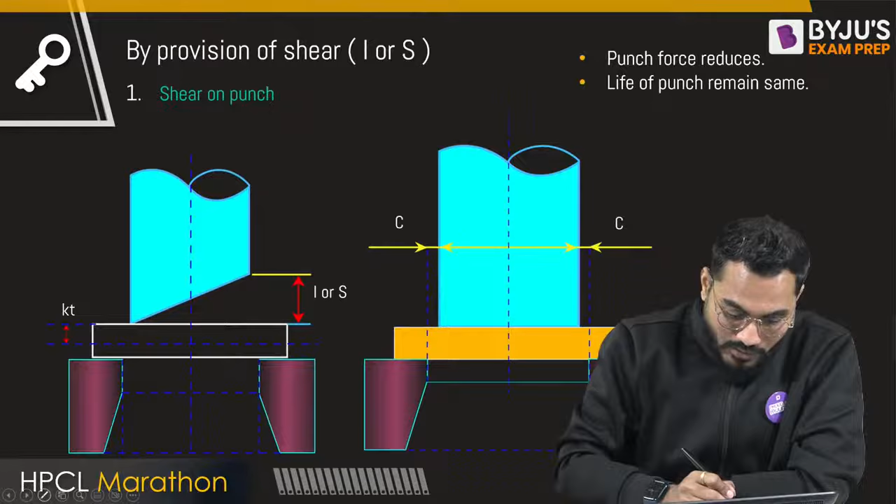Yes, Kiran Kumar, absolutely spot on sir. In the sheet metal operation, the punching and blanking force can be reduced by a number of ways: one is shear provided on the punch, or staggering of punches, or a combination of both. Shear provided means instead of having the flat shape of the punch, it is made into an inclined one, and therefore cutting takes place in successive stages. Naveen and Piyush, absolutely correct. My answer will be exactly equal to: by providing shear, I'm damn sure this force will get reduced.

Superb, scintillating. Next question, look how beautifully that question is crafted. Just talk about that, let's see that.

Cold forming, listen to that: cold forming is a process in which the hardened tool is pressed against the workpiece to produce a rough surface with a regular pattern. If I want to produce a regular pattern on the workpiece by pressing the hardened tool, there is no removal of material, only plastic deformation takes place. What will be the answer?

It is called as knurling, or strip rolling, or chamfering, or roller, or roll forming. What is the answer? Naveen says A, Piyush says A, absolutely correct.

Knurling operation creates a pattern, a hatch pattern. So can I say that this is exactly equal to a pattern being created? The hardened tool is pressed, so the force is applied in this direction. It is pressed here, and therefore by plastic deformation, that replica shape is generated on the cylindrical body.

Good afternoon, sir. Your engineering section is really amazing. Yes, thank you, Hima - Himvi, right, fine.

So what is the answer? Sir, knurling is my answer. Is it true? Yes, all these questions are handpicked, which will definitely take you in the forward direction as far as the HPCL examination is concerned. Let's be strong, right, fine.

Where are we utilizing that gutter? Tell me, everyone comment in the comment box. Sanket Pawar, hi, how are you? Piyush, Kiran, answer is talking about A. Piyush and Kiran are saying, yeah, absolutely correct, sir.

Closed die forging is a forging wherein, in the closed die operation, the volume of raw material is 10 to 20% extra than the volume of the final finished product. That extra volume I'm providing will flow in the outward direction. So there has to be a certain place provided where that extra volume of material should be collected, and that is nothing but called a gutter. Absolutely, Mani, Benny, absolutely correct.

What is the answer, sir? Closed die forging. And we know that the volume of raw material is 1.2 times the volume of the final finished product. Why? Because the entire cavity has to get filled, and to ensure that, the volume has to be greater. That extra volume will flow in the outside direction - you can easily understand that this extra volume will flow outward.

And to collect that extra volume of material, there is one place provided - it is nothing but called a gutter. It appears in closed die forging operation. So therefore this will be my answer: closed die forging operation. Is it okay? Mani, Benny, Sanket, Kiran, Piyush - absolutely spot on, yes, your understanding. Very beautiful questions are there.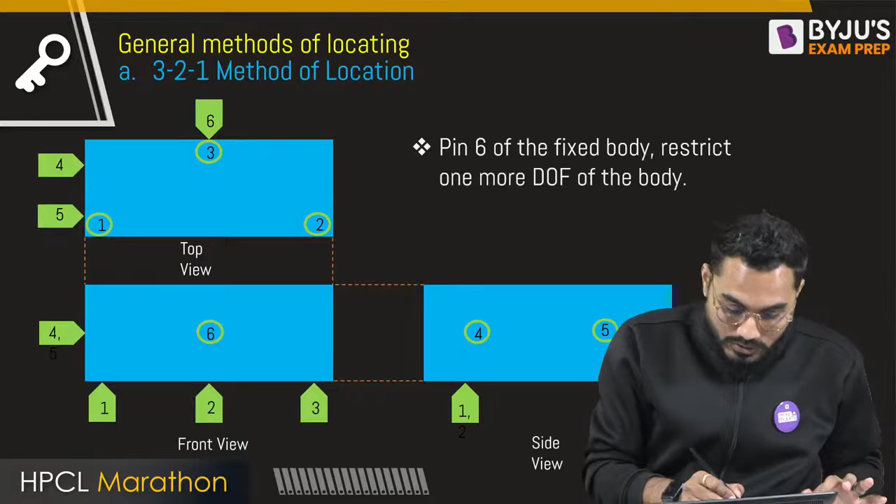Let's come here and understand. This is the body placed on 3 pins - 1, 2 and 3. This is exactly equal to pin 1, this is the 2nd pin, and this is the 3rd pin. Three pins on this body are rested.

So the body cannot move in the linear direction downward. Therefore, can I say that 1 linear degree of freedom is arrested? There are 3 axes - x-axis, y-axis and z-axis.

Can the body rotate about the x-axis? This is the x-axis, and this is the rotation of the body about the x-axis. Is it possible? No, because pins are there. It cannot rotate. 2 rotational degrees of freedom are arrested along the x-axis.

Now this is the z-axis, perpendicular to the plane. This is the rotation about z-axis - is it possible to rotate? No, because the 3 pins do not allow rotation in that direction. Again 2 degrees of freedom are arrested, along x-axis and along z-axis. So 2 plus 2 equals 4 rotational degrees of freedom arrested.

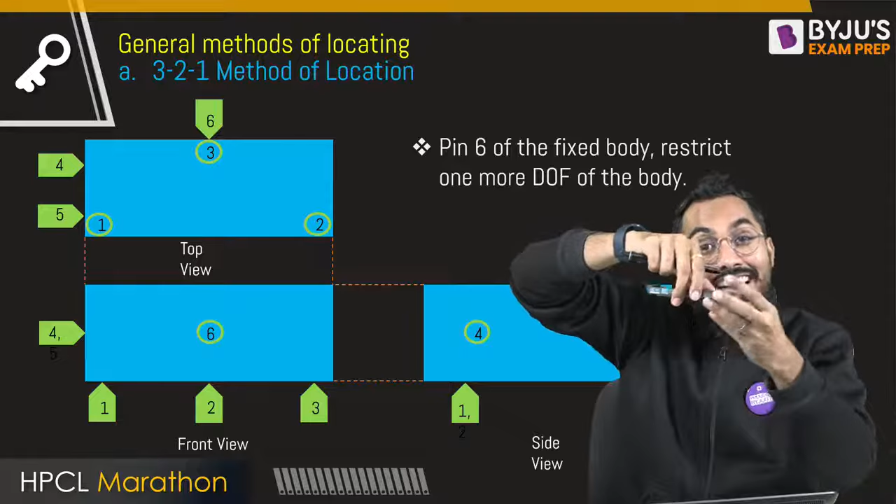Now this is the y-axis. Is it allowed to rotate like that? Yes, it can attain this rotation because of the plane and the pins. It can rotate like this, right?

Don't forget this fundamental: 1 linear degree of freedom and 4 rotational degrees of freedom. So in total, how many degrees of freedom are arrested? 5 degrees of freedom are arrested.

Are you accepting, Kiran Kumar, Piyush? Don't underestimate these questions. Right, Piyush, Anand - what is the answer? Not D. C - Madhu Vamsi, I think that's correct. So the answer is exactly 5 degrees of freedom arrested. Is it okay everybody? Yes. Kiran Kumar, everybody is understanding.

Okay fine, we are moving now. Now tell me - a CAD-CAM question is coming, a beautiful question. What is it? The transformation matrix

for mirroring a point in the xy plane about a line x equals y or y equals x. There is one line where the x coordinate and y coordinate are the same. Suppose this is the xy coordinate plane - what is the line? Sir, the line is nothing but the locus of all points whose x coordinate is exactly equal to the y coordinate, that is y equals x. Can I say that this will be my line?

This will be my line, which bisects the first quadrant. Can I say that it makes an angle of 45 degrees? 45 degrees - I hope you are understanding.

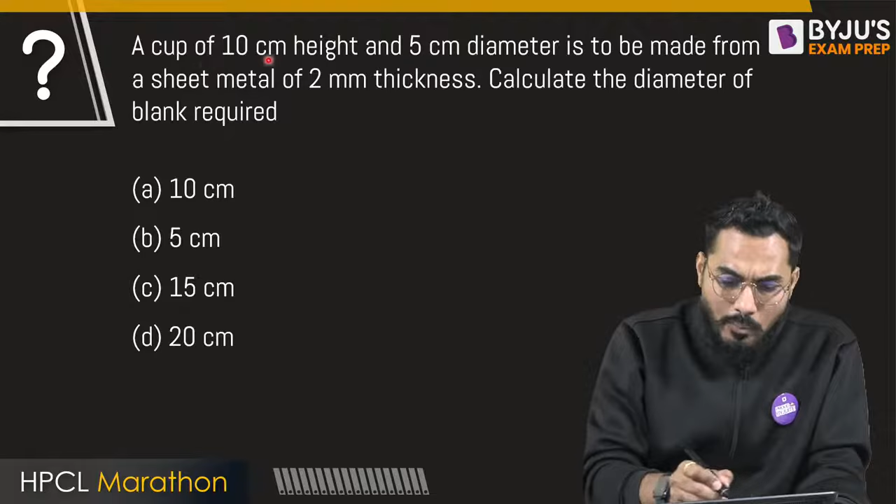Is everybody accepting? Yes, this is my prediction. I think so - look, one beautiful question, hand pick. What is it? A cup of 10 centimeter height and 5 centimeter diameter is to be made from a sheet metal of 2 mm thickness.

Calculate the diameter of the blank required.

I'm extremely sorry, but I'm getting too hot here. I have to remember I'm not wearing a t-shirt, but you are watching Byju's Exam Prep. So are you understanding? Excuse me for this. No worries, right, fine.

So what exactly am I understanding here, sir? Calculate the diameter of blank required. Diameter of blank required can be calculated exactly equal to... it is very simple. Diameter of blank required is D square plus 4 into D into H. Is it accepted? Is it okay? So can I say that D is exactly equal to root of that?

What is diameter square? 5 square plus 4 into diameter 5 into H. Right, fine, everybody, it is not that much difficult calculation. Without a calculator also you can do that.

Why are you hesitating? Tell me the answer. We are here to learn. Sir, the answer is: 5 square is 25, plus 5 into 4 is 20, plus 10, or 20 multiplied by 10, 200.

Root of what? 225. Don't you know the root of 225? Sir, diameter is coming exactly equal to 15 centimeters. Isn't it, Riyad? This is what the diameter is coming to. 15 centimeters.

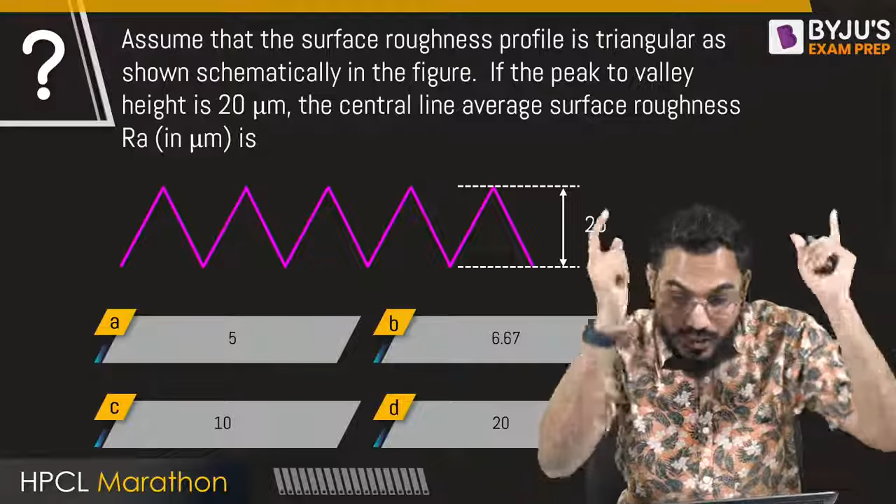Yes, if the peak to valley height is 20 micrometers - in this particular profile, this will act as my peak, this will act as my valley, this will act as my peak, this will act as my valley, and between them there is a 20 micrometer distance. The center line average, that is average roughness value - center line average or average roughness value, that is RA.

RA, what is RA? Piyush is saying A, Navin is saying A. No, I don't know, it might be a previous answer. Right now you tell me the answer - A or B or C or D.

I've taught you so many times, there is a derivation. When we talk about the single point cutting tool, this is my end cutting edge CE, this is exactly equal to the side cutting edge CS, and because of that a certain profile is generated. We have set the relation between RA and maximum peak to valley height, that is exactly RT. RA average roughness is exactly equal to RT by 4, H by 4. This is the formula. This is given - this is my RT, maximum peak to valley height, so you require RA, so RT by 4, that is 20 micrometers divided by 4.

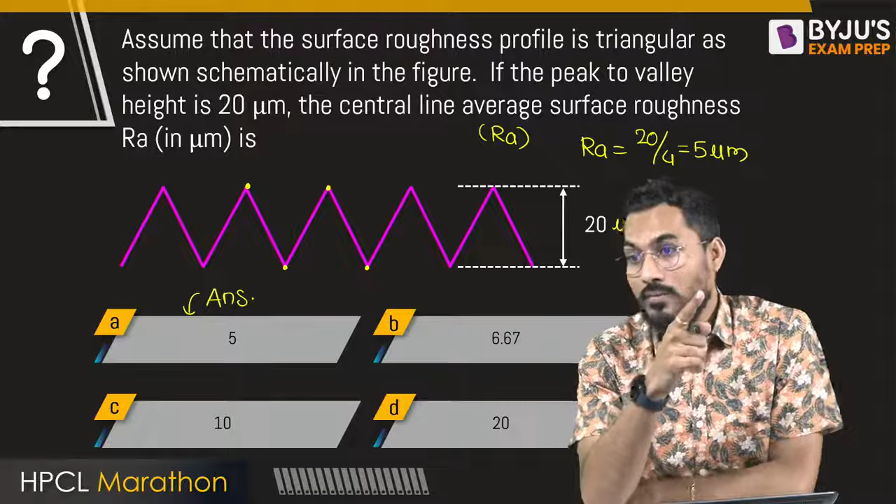Answer is 5 micrometer. A is a perfect, spot-on answer. Kya baat hai, dil jeet liya.

Next question - what is in the kitty? Oh my God, sir what a chiller question you're asking. But these are all questions from examination.

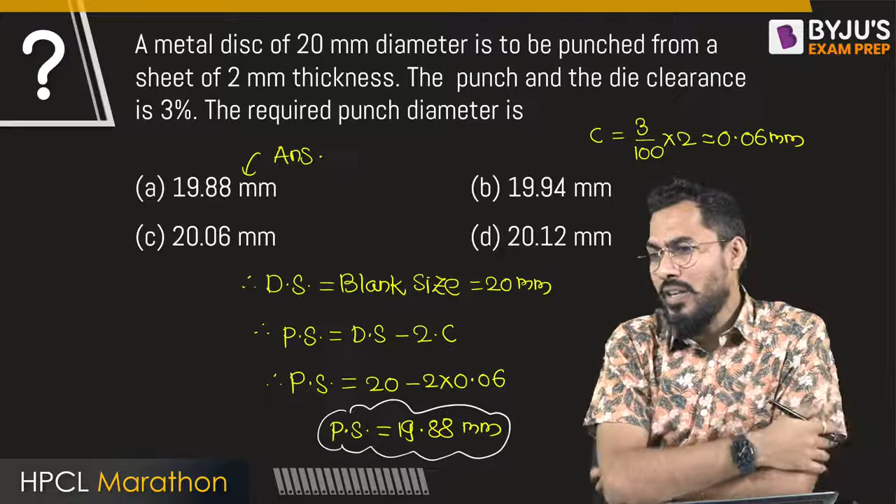Are you accepting, everybody? Yes. What is answer? 19.88. That is the correct answer. Don't make a mistake, my dear friend. These are all simple questions with the simple fundamentals.

I'll simply say that machining time TM is exactly equal to length, how much distance I have to travel, divided by speed. That is called as feed rate, that is called as feed velocity.

And we know that feed velocity is mentioned by F into N. F is nothing but called as feed, multiply by N is nothing but RPM. Feed is mm per revolution, RPM is revolution per minute. So can I say revolution will get cancelled, and the unit of F into N is mm per minute.

That is the feed velocity. Yes, fine. So now we are interested to calculate feed rate, that is F. So I'll take F to the left hand side.

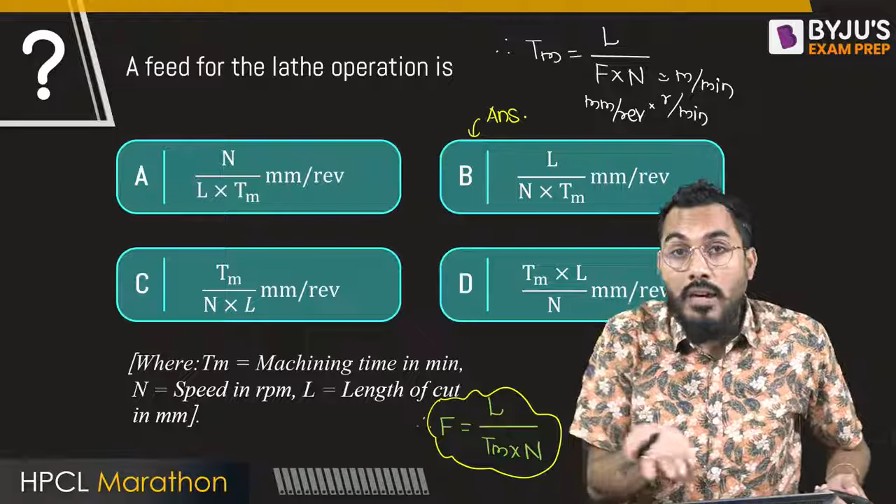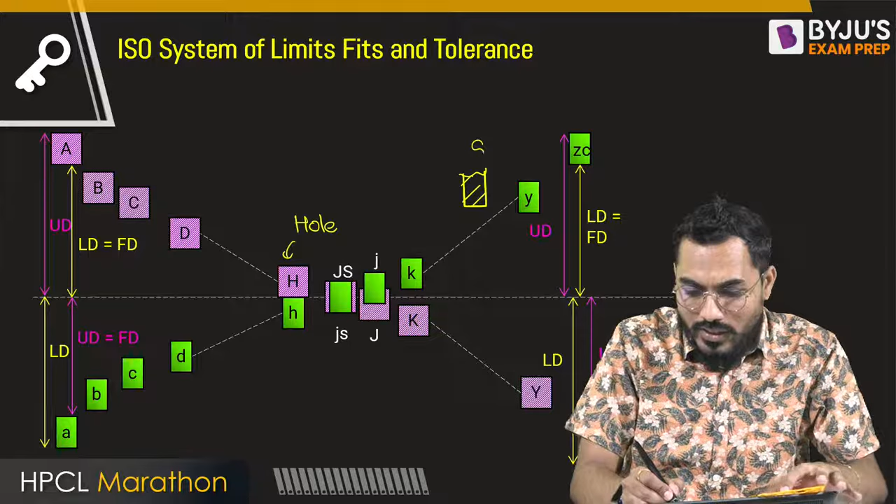Is it okay, everybody? Yes, if I want to draw in a perfect manner, I'll say that this will be a place like that, that is nothing but where shaft S will come. So can I say that if this is the shaft S, that is a small case letter, and this is my hole, can I say when they assemble, what will generate?

A clearance fit, or sorry, what is that? Interference, shaft is bigger than the hole. Absolutely correct, shaft is bigger. So can I say that shaft diameter is greater than the hole diameter?

So can I say when they are interfering, when there is assembly, I have to apply force? If I want to apply force, can I say that there is a force fit coming? That is nothing but called interference fit. Delhi D is the correct answer, interference fit. Is it okay? Yes. Next question.

Okay, very scintillating, fundamental question. A dynamometer is a device used for the measurement of what? What is it basically used for? Dynamometer is an instrument, it is used for what? Is it used for chip thickness ratio, or forces during metal cutting, or wear of the cutting tool, or deflection of the cutting tool?

What it measures? Absolutely correct, everybody has given a superb answer. Bombay B, Kiran, Bridges, Sanket, Naveen, Harsha.

Sir, we know that dynamometer is an instrument utilized for measurement of metal cutting forces. There are different kinds of dynamometers utilized, and they can measure the forces during metal cutting in lathe machining operations, drilling operations, or sometimes milling operations. So dynamometer measures forces during metal cutting. So my answer is exactly equal to this, forces during metal cutting.

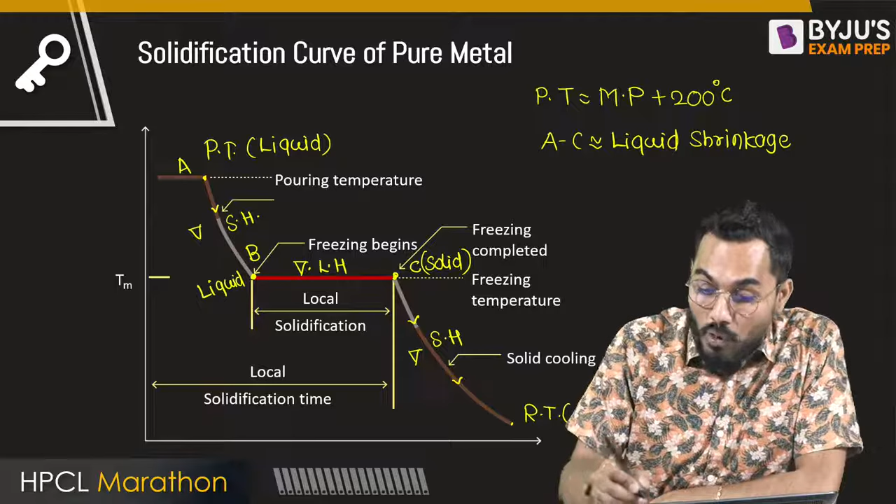That is compensated by providing riser. But what is the question he is asking? For solid contraction, compensation for solid contraction - that means we have to provide an oversized pattern. That is nothing but shrinkage allowance.

One more scintillating question: material removal rate. Will material removal rate be higher in ultrasonic machining process for material with higher ductility, higher fracture strain, higher toughness, or lower toughness? This can be considered a material science question, or an NTM process question. If I require a higher and higher material removal rate, which particular material will have higher material removal rate - A, B, C, D: higher ductility, higher fracture strain, higher toughness, or lower toughness? Tell me the answer.

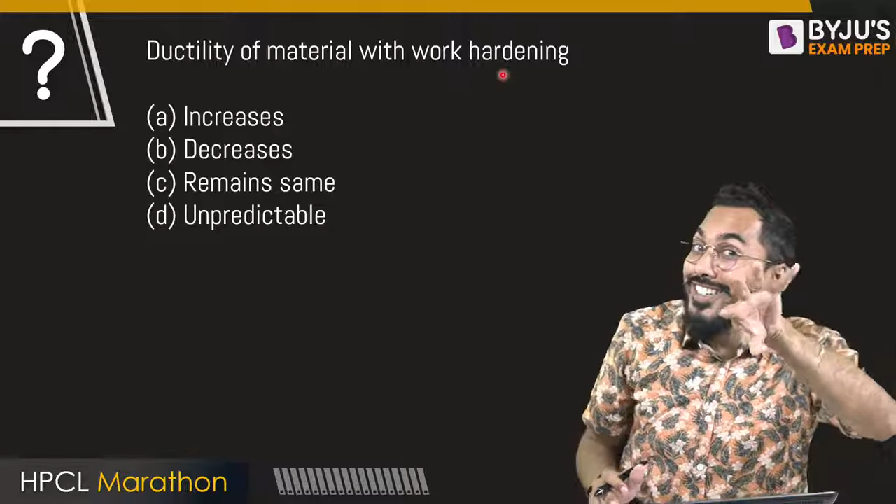Yes, now next question, a scintillating question. You have to tell me about the ductility of material with work hardening. When the material goes through work hardening, what is happening to the ductility? Does ductility increase, reduce, remain the same, or is it unpredictable?

What is it? Sir, ductility of material with work hardening, what is happening? Is it increasing, Kiran Kumar? With work hardening, does ductility increase? Decreases, Piyush, yaar kya baat hai. Sir, we know that work hardening means what?

Work hardening is when the value of stress reaches yield stress, the material starts deforming plastically. For further strain to generate, for further plastic deformation, my stress has to keep on increasing. That means for further strain to generate, my stress should keep increasing. That is nothing but called strain hardening, meaning the body is going through strain hardening.

Assume this is my yield stress and this is my ultimate stress, so this much is the total deformation capability. Up to this, the body can deform - this is the maximum deformation capability before fracture takes place. This is my total strain that can be generated. Now my body is deforming, and my stress is generated up to here, and the body went through this deformation.

So already this much deformation has happened in the body, this much strain has occurred, and now I am unloading the body. Now how much further deformation is left in the body? The furthermore deformation left in the body is only this much - only this X deformation the body can go through, and it will fracture at ultimate stress.